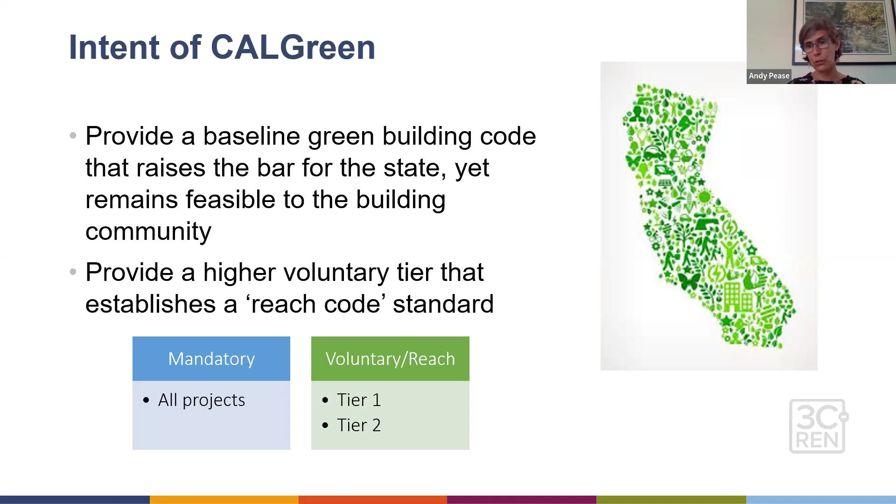So there are mandatory measures, and all projects are going to require those. The voluntary and reach tiers were intended for jurisdictions to have a little bit higher standard. A jurisdiction can either adopt the entire green tier 1 or tier 2, or they can spot grab them.

Mandatory is what we're definitely going to focus on—that's what we see more of going on. And there's an evolution, right, in our code cycle.

So in 1975 is when we started the California Energy Commission and the Energy Code. And it was good—it's been an amazing progression, catching it early for us.

In the late 90s, early 2000s is when LEED came online, Leadership in Energy and Environmental Design. It's a totally separate nonprofit entity, and that's been a successful program.

And then in 2009, California adopted CalGreen. It was totally voluntary at first, and then has become mandatory over each cycle, but they modeled it after LEED. Yay—that was huge. It was really helpful to be able to have some parallel.

And so it made it understandable for the folks who were already doing that, and it has continued to be a good structure for us. So as we go forward, we're getting better buildings, and they're more sustainable, energy efficient—all of those pieces.

So the highlights from the 2022 code change—it was really all about electric vehicles. The requirements, how it was structured, increased requirements for actual charging stations. There were some new ones for volatile organic compounds and emissions for insulation, acoustic ceiling tiles, etc.

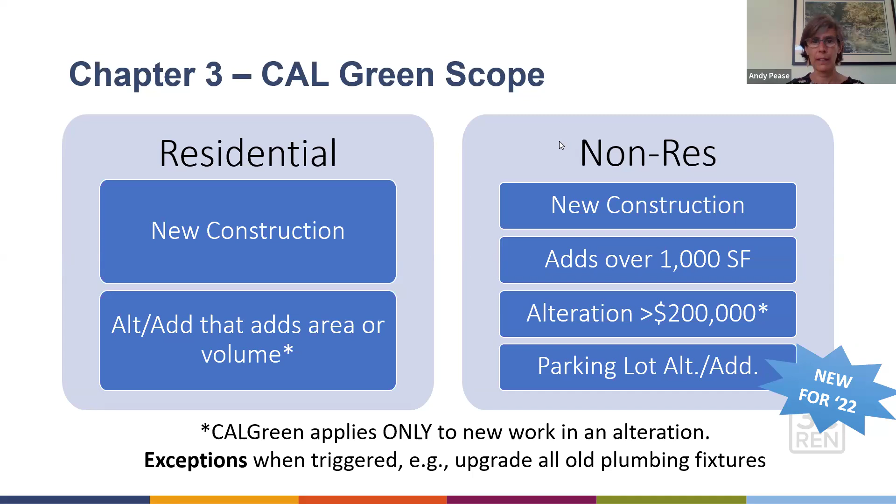And as we mentioned, parking lot alterations or additions are now part of the CalGreen scope. You also need to make sure to check for mixed occupancies. The residential parts need a residential checklist, and the non-res parts need a non-res checklist.

That's particularly true in mixed use, like hotels or motels. If it's a multifamily building with a community room that's only for the use of the residents, that still fits within the residential code. But if it has a restaurant downstairs or a retail shop open to the public, that would fit into non-res. So you might need 2 checklists.

And then for phased buildings, it just applies to whatever part is in that scope. So a shell building might just have whatever components apply—maybe it doesn't have plumbing yet—but then the tenant improvement will need to comply with CalGreen.

And then a tenant improvement has to hit those thresholds for a renovation—the 1,000 square feet or the $200,000 valuation.

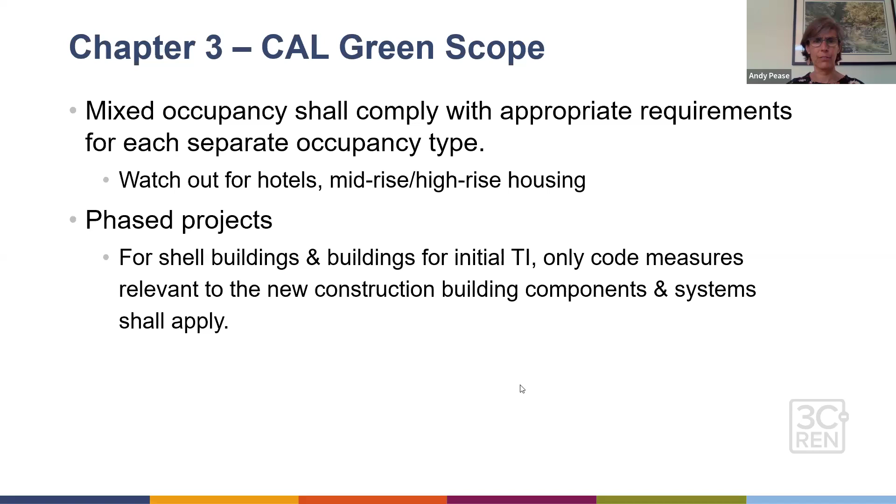All right, so how do we actually show compliance? We have an Excel spreadsheet with all the codes, and that way we can reference the notes. The AIA California has also put together this handy full page sheet. If you're an AIA member, you can get a hold of this, but it's only useful if you follow the notes—there's a yes, not applicable, and then a reference. So you can't just put this sheet on and be done. That's like putting the code on your plans but not incorporating it into the drawings itself.

So for whichever measure—if it's for outdoor irrigation—then you would show on the landscape plan where that actual compliance is demonstrated.

Okay, so we're going to jump into the mandatory measures of chapter 4 and 5. Again, this lines up with LEED. In LEED, it's site or location and transportation; here it's planning and design. Then we go to energy efficiency and then water efficiency—that's switched from LEED in the order, but still the same categories. Then material conservation, and then environmental quality is last—that's all the indoor air quality components.

Chapter 4, or division 4, is all residential, and 5 is non-residential, but they parallel each other. So as we go through this, when they're on the same page, on the same topic, we'll address them together.

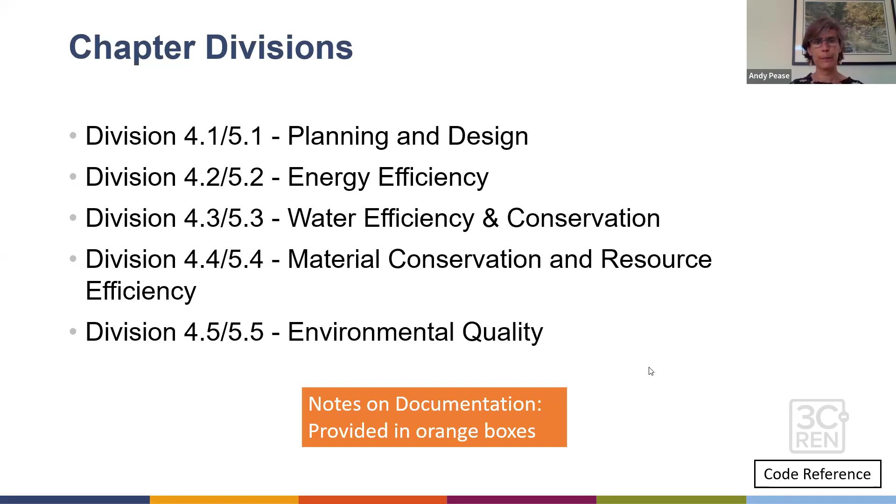Also, each one of these has the code reference down in the bottom right corner so you'll be able to circle back to the code. And throughout, we'll have these orange boxes with particular notes about documentation. If we can make it easier for the plans examiners and the builders, that's a win for everyone. Okay, we good still?

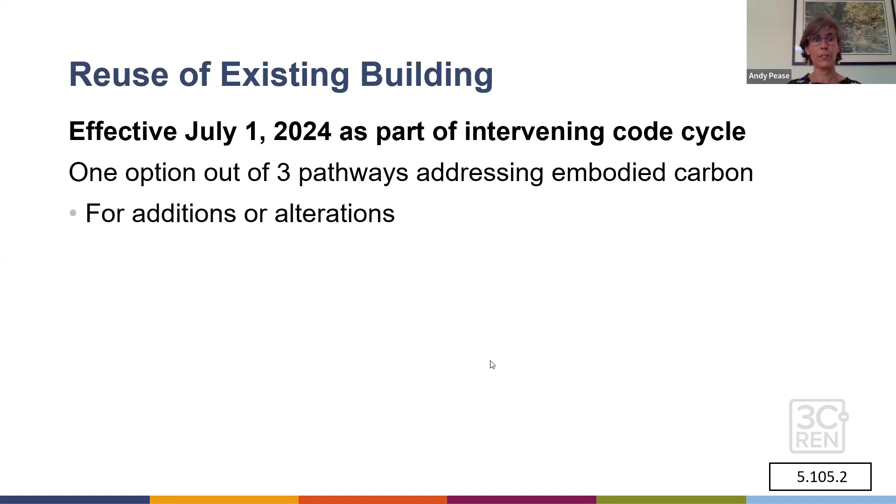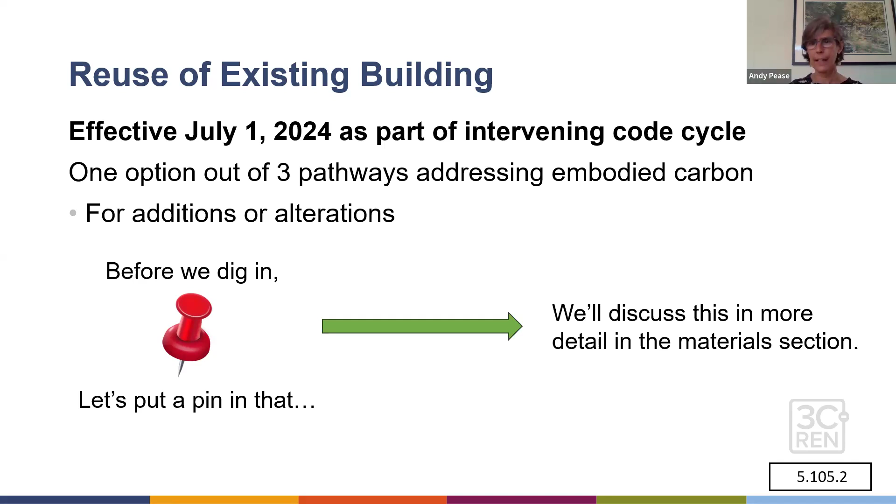All right, so the very first section under 5, in planning and design, is that effective July 1st, as part of the intervening code cycle, there's an option for embodied carbon for additions and alterations. But before we dig into that, it's super involved and there are 3 different paths, so we're going to put a pin in that and talk about it when we get to the materials section, which is the bulk of it. Okay, pretend that didn't happen—we'll see you again in chapter 5, or 4, I guess.

Okay, so these are ones I'm going to skip through because they've been in the code a long time, but just for folks who are new or want a refresher—like, oh yeah, that's where I find that. Stormwater pollution prevention during construction, for smaller sites less than an acre, you're just doing your best practices in terms of erosion control. And if it's larger than an acre, then you're going to get into the National Pollution Discharge Elimination System. This is very well monitored, and you're going to have your plans.

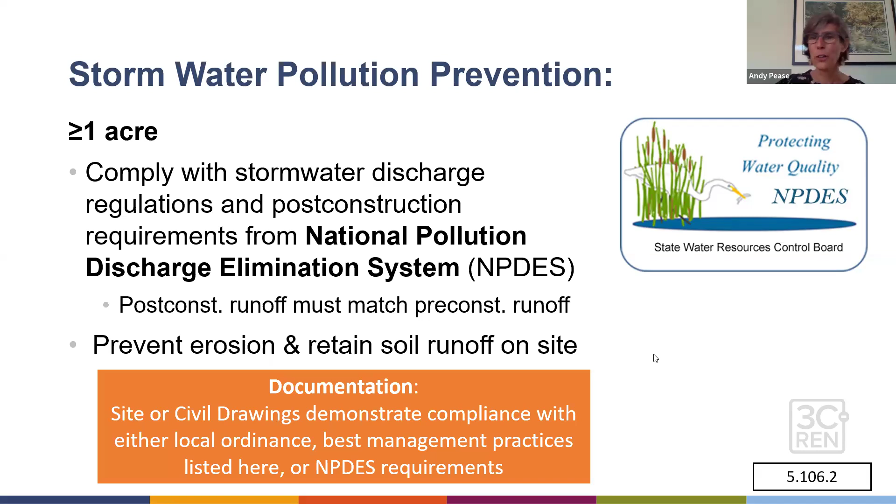They'll be looked at closely. So this is almost token that it's in here because it's monitored very closely.

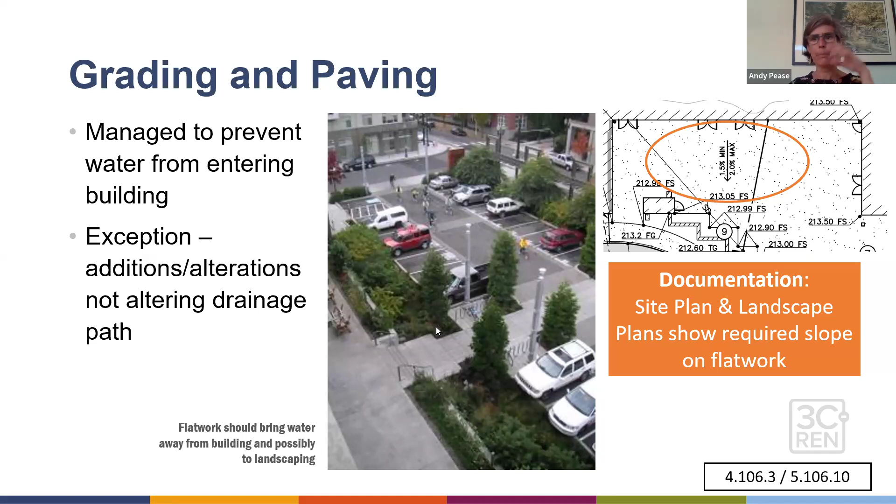But grading and paving, this is important. Again, this is good best practice. What we're trying to do is both have water slope away from the building, and that should be shown on any flat work near doors of the building, showing what that slope is. But also in this image, we're really moving toward capturing stormwater in ways that match the natural hydrology, so that we have bioswales, permeable paving, all the types of ways that we're slowing, spreading, and sinking stormwater on site.

Okay, going on to bicycle parking. This didn't particularly change in the last cycle, but we still sometimes see people get dinged up on it. There's short term and long term bike parking. Short term is for guests, and it could just be a regular bike rack, but it needs to be within 200 feet of the entry.

As a cyclist, I would also ask it be someplace super obvious, because it's really hard to be circling all over the building looking for them. It's in a ratio of how many parking spaces you have. Now if you have a big open lot for employees and guests, you need to make a call on how many are guests and how many are employees. It won't matter for anything else, but it is the metric used for short-term and long-term bike parking.

For long-term bike parking, think of your employees who want to bike to work - they want someplace secure for their nice bikes. So it could be lockers outside or a room inside, but it needs to be something secure. A couple of examples.

Oh, and public schools and community colleges have slightly different requirements, as you can imagine, more. You should put them on the bike calculation so that the jurisdiction having authority has an easy way to make sure you have enough, and then you need to show them on the site - either a site plan, architectural site plan, or landscape, or ideally all three.

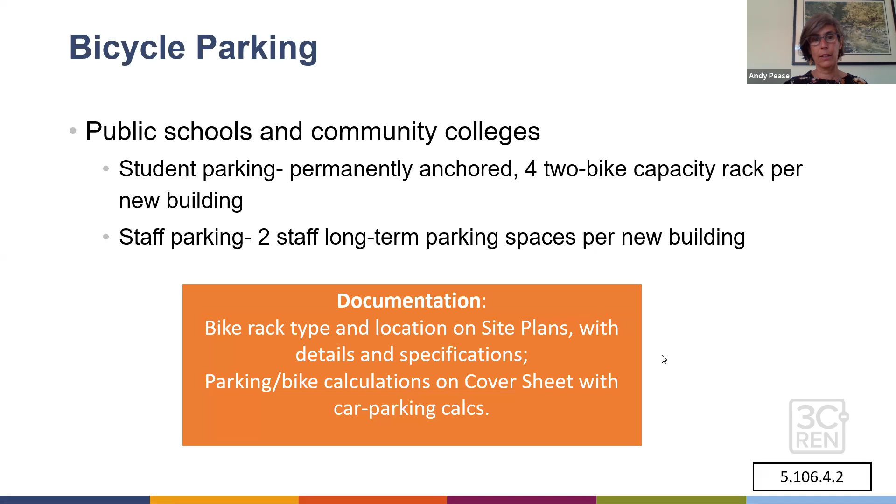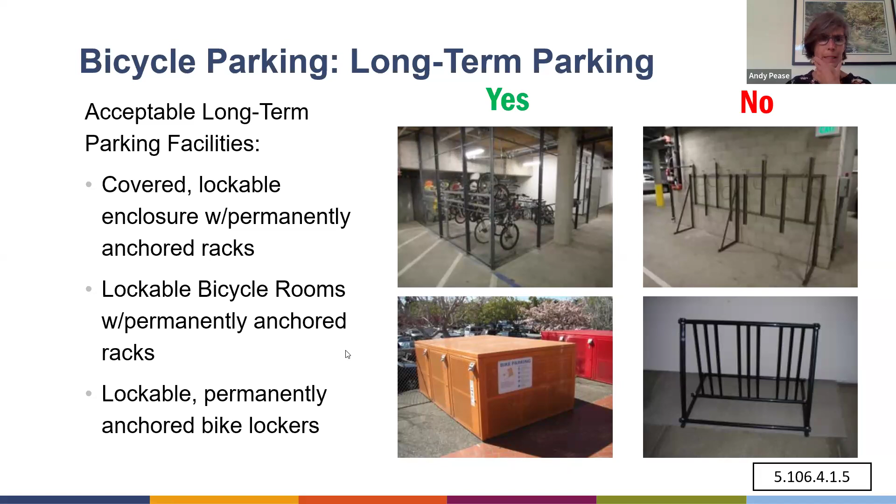Okay, now we're going to get into electric vehicle charging. We'll do some EV readiness, the definitions. We'll talk about single family, multifamily, and non-res. Then, new in '22, was getting ready for medium and heavy duty truck charging. And then finally, the additions and alterations.

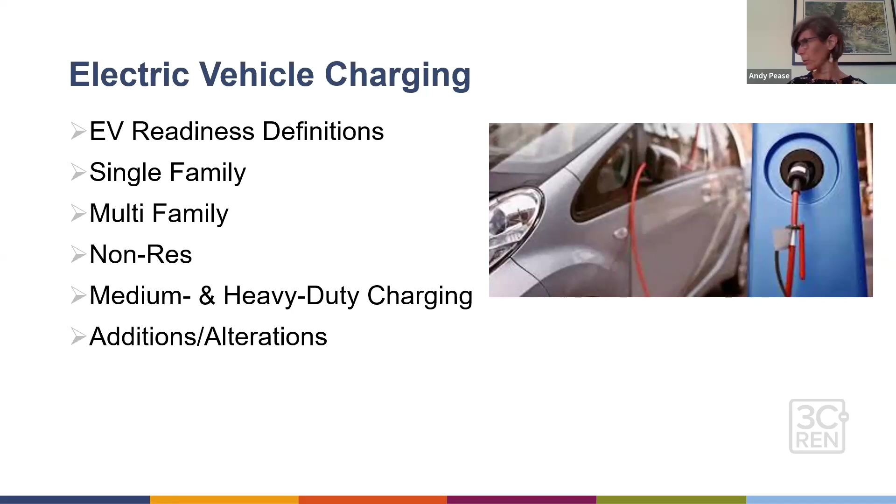Have we been able to address questions as they come up? Are we still doing okay on that? Yeah, we're still good on that.

All right, so there are basically 3 types of EV charging infrastructure discussed in the code. The first is EV capable, the lowest threshold - basically an empty conduit that goes from the panel to where you might have charging in the future. You can't use it for charging anything, but it's also not really wasted resources. EV ready is having a space that's fully wired and has maybe a receptacle, but doesn't actually have the charging equipment - it's ready for equipment and has space in the electrical panel, but it's not actually for charging. And then the third category is the actual EV charging - level 2 EVSE, with SE meaning supply equipment, which makes a charging station, an EVCS.

I just apologize on behalf of the California Building Code that we have to make that so confusing. All right, this little diagram I end up circling back to because the names are just not intuitive.

Okay, and just for folks who are not necessarily EV drivers or users, if that's newer to you: level 1 is basically the slowest you could possibly charge a car, just an outlet. That's not referenced in the code at all because it's only 120 volt, 16 amp. Level 2 is when it starts to be useful - this could be the actual charger at 208, 240 volt, 40 amp. It's important that it gets that higher amperage because there's another offering that's a lower amperage. And then there's direct current fast chargers, which you'd think of as Tesla, but there's a whole bunch of them now. They're allowed in the code, but they're not required, so we'll talk about some options for substitution.

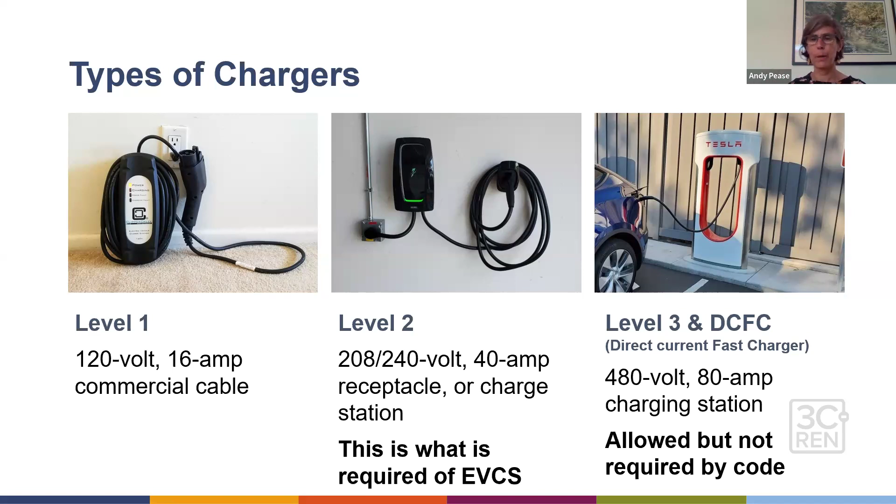For those spaces that are EV capable or EV ready, it needs to be really well labeled. If you've done the work of putting in a conduit, you've got to make sure it's super easy for somebody in the future to install those EV charging stations. So you've got to label the breaker, and you have to have the stub-up labeled at the actual EV space.

But you don't label the parking stall itself, because that would be confusing to the public. So think of it as communicating to the owners and managers about what's capable, but don't actually mark the stalls for people until you get to an actual charging station.

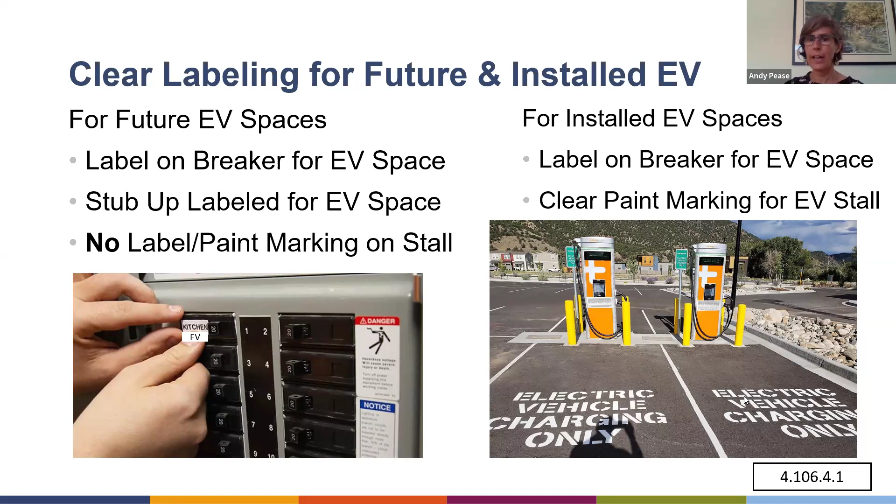And then clearly, once it is a charging station, you should mark that it's for EV charging only. Depending on which charger, they can be there all day, or they might need to rotate if it's a Tesla.

Okay, new single family — this is the lowest bar. All you have to do is EV capable. That's just an empty conduit to a panel, so somebody could do it in the future.

This was a big discussion point in the code, but in the end they decided, because adoption of EV charging is still all over the place, they didn't want people spending money and the material resource of copper to have wire abandoned in these conduits all over the state. So that's how I think about EV capable — it's the lowest bar.

And that's not required if you're doing accessory dwelling units or junior accessory dwelling units. The state has a very low bar for adding ADUs and JADUs, so they do not trigger the requirement for EV capable — that's if you have an attached garage associated with it.

Okay, so multifamily and hotel-motels. Last month we covered EV capable and EV ready, and now we have more. As of July 1st, 40% of all parking spaces need to be low power level 2 EV charging receptacles, which I'll touch on in the next slide, and then 10% need to be level 2 EV chargers.

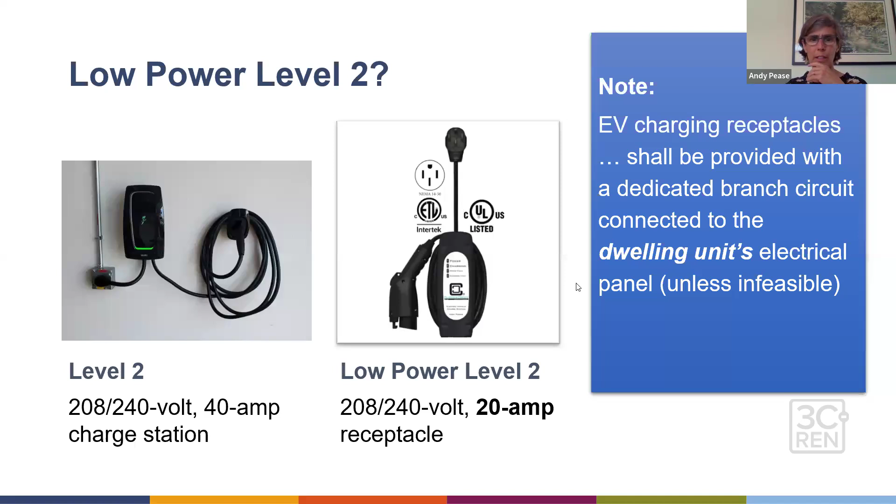It should be assigned — if the parking spaces are assigned to the unit, then you have to have the charging stations assigned to the units. And that makes sense, right? Because you want alignment of your power use with your electric bill. There are exceptions — if it's not feasible for whatever reason, that's okay, but that is the intent: to have the charging billed to the individuals.

Okay, in the non-res world, there's a table based on the number of electric vehicle charging stations and how many of them count — basically this empty conduit requirement. The kind of weird thing here is that the number of charging stations gets deducted out of the capable count. So if you have 28 parking spaces, 8 of them need to be capable, but 2 of those 8 need to actually have charging stations.

So you're really doing 6 capable with empty conduit, and 2 that have the actual charging stations.

So again, apologies on behalf of the code, that is a little confusing, but that is the intent.

Interestingly, it's a reminder, the supply equipment that they reference here versus an EV charging station. And then at least 1 level 2 supply equipment shall be provided.

Okay, now why would they say that? Because they already just said it needs to be supply equipment. Well, that's because they give you a few options to be able to comply.

So if you are in a community where people are going to have fast chargers, you can actually sub out. You can do a level 2, or if you have 1 DC fast charger, it can substitute for 5 of the level 2 chargers. So if you require 8 level 2 chargers, you can do 1 of the Tesla type and the other 3 as level 2, or you could do 2 and that would cover it, except for this little requirement: at least 1 of them needs to be a regular level 2, because they figure not everybody's going to have a Tesla.

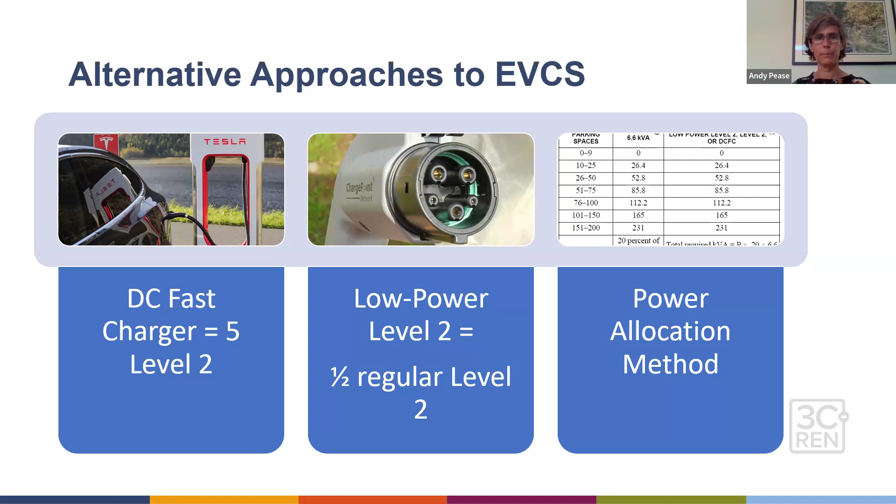Okay, and then just a reminder that any type of parking with electric vehicle charging still needs to have access compliance. If it's hotels, motels, public housing, it's going to trigger ADA access for electric vehicles.

There's different ways to do it. You can have 1 charger that goes to the compliance here. If it doesn't show up in chapter 11, there's also, in CalGreen, specific dimensions for electric vehicle spaces to make sure that they're hitting the right minimum size requirement.

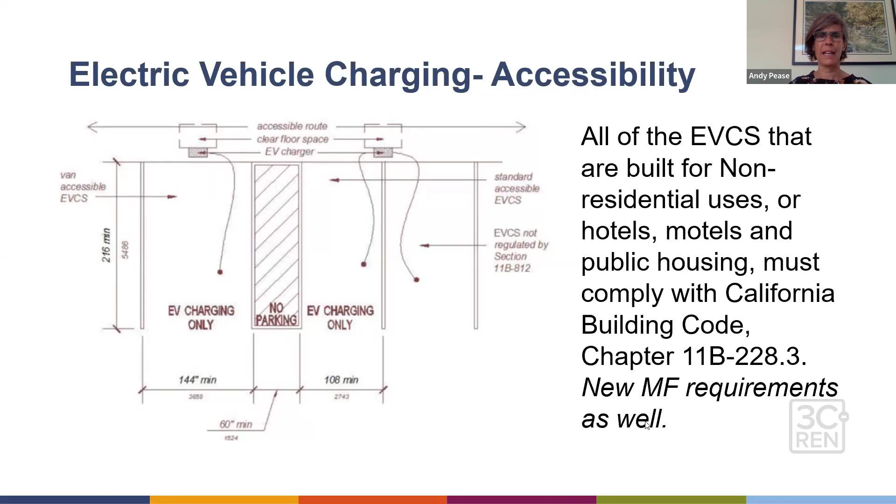And it does not count for your accessible parking. So if you need 3 accessible parking spaces for your project, and you need electric vehicle spaces, then the electric vehicle space needs to be van accessible, and it doesn't count for your 3 minimum ones, because you don't want somebody taking up the charging space and not allowing for EV.

So again, bigger topic. Hopefully that's enough for you to remember to just check on the access compliance.

All right, and then kind of going on to this, came out new in 2022: we need to have capacity for the electrical capacity and raceways, so the conduit, this is that EV capable type of thing for trucks. Up through last month, it was grocery stores, retail, and warehouses, and you could see the size of the building thresholds. As of last week, we have now added manufacturing facilities and office buildings of a certain size.

So we're going EV trucks, and we want to make sure that we're ready as a state. So there's kind of a KVA and capacity requirement there.

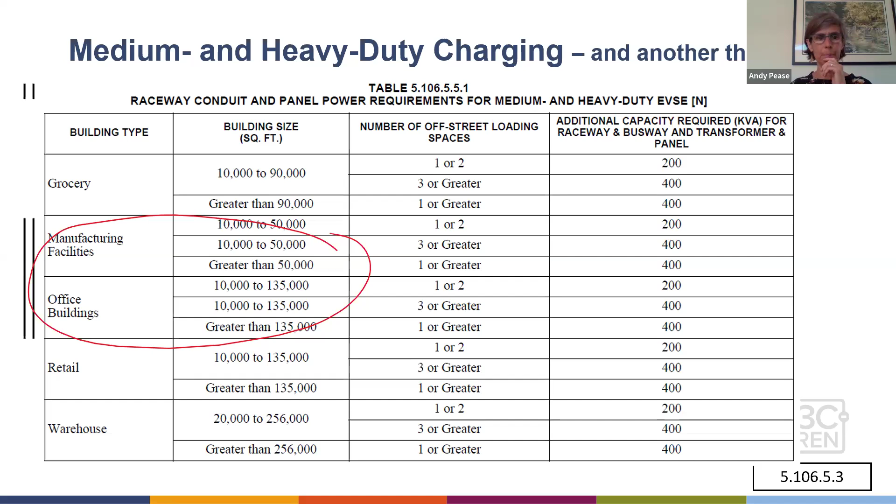Okay, there's also new EV charging requirements at public schools and community colleges, very similar to the non-res, just a slightly different table. These are a couple spots from Cal Poly.

And then this parking lot additions and alterations — the idea here is that if you're just restriping or refinishing, it doesn't trigger the requirements. But if you are adding on new square footage of parking, or digging it up enough that you're adding electrical, solar panels, or adding lighting so you're running conduit and messing with the electrical, then you need to add in electric charging in alignment, whether it's res or non-res.

So for residential HCD projects, it says 10% of spaces that are added or altered must be EV ready. For non-res, basically whatever you've triggered now needs to meet the non-res requirements.

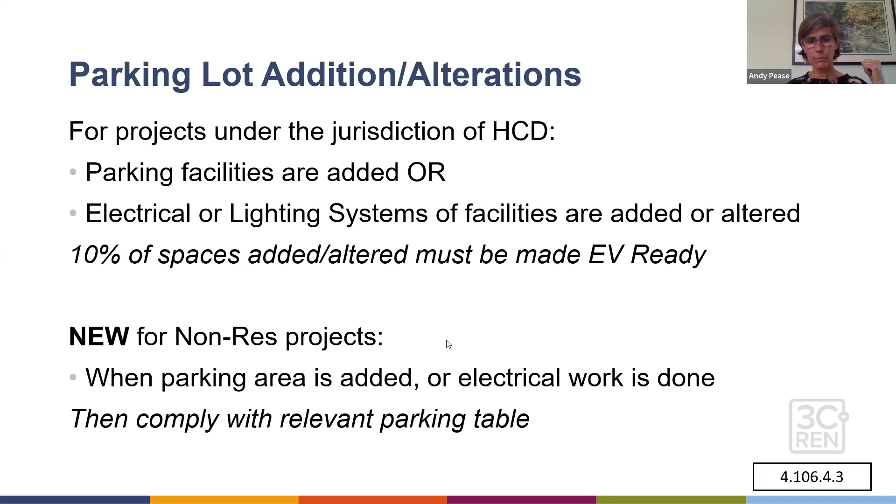Documentation for EVs, again, let's make it easy for our plan reviewers. Have the calculations on the cover sheet, show the number of spaces. There are two ways to label the plans. One shows this is an EV-ready space, for the plans examiners to know where to put things, or for coordination with your electrical engineer. But EV charging only communicates to your builder what striping to put on the stall. So make sure it's super clear between those two, what's being striped on the stall by the contractor versus communicating to the team and the plans reviewer where you have the conduit stubbing up.

And then, of course, sufficient capacity should be shown on your electrical sheets, and again, make it super obvious for that electrician to understand about labeling it as well.

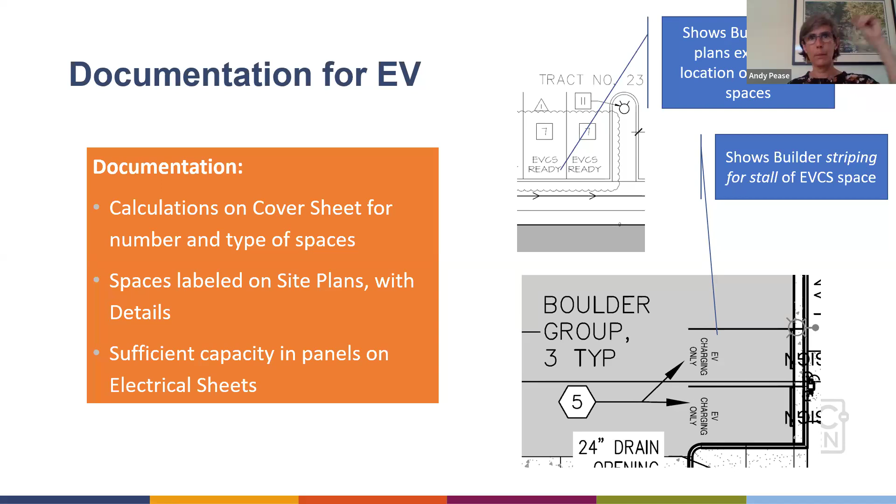If you've been doing this for a while, you remember we used to have this whole designated parking for clean air, van pool, EV, and all of that's gone. We're not doing that anymore because now we have charging stations. Code moves quickly. You'll still find lots of parking lots that have this kind of striping and labeling, but that's no longer part of the code.

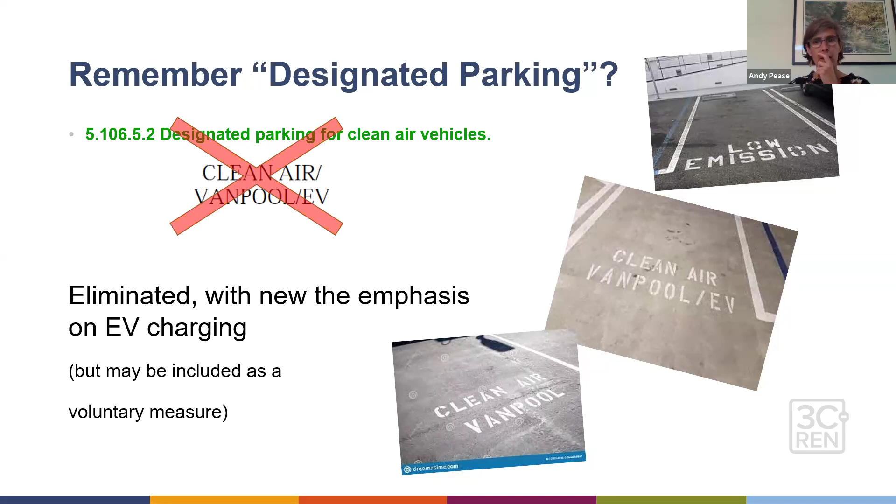You can add, there is a voluntary measure option that you can get some credit for it.

Before we move on from EVs, we have a question from Peggy. Do third-party level 3 high-speed chargers provided by an EV charger company get credited to the property owner? My understanding is yes, if it is on the property. And even if there's a fee associated with it, it doesn't say you can't charge for the electricity. Great question.

In fact, we did that for the hotel down in AG to be able to do that. They had a fast charger there.

All right, I'm going to finish up the site, the planning and design credit before we move on to water. There's just a couple left in here.

Just outdoor lighting. Again, this has been in the code a long time, keeping track of that backlight, uplight, and glare, the bug ratings.

The one thing they did fix in 2022, or maybe even the intervening code cycle before that, is to align it with the energy code, because there was an exception if it's a super low wattage, or lumens with less than 6,200 initial lumens, that doesn't need to show their bug rating. So do provide a lighting schedule on the site plan or the electrical plan with the required bug rating and the bug rating of the fixture, so you can just check and make sure that it complies. We've gotten dinged on that one for sure. A lot of people, especially with super unusual light fixtures, just might not have bug ratings.

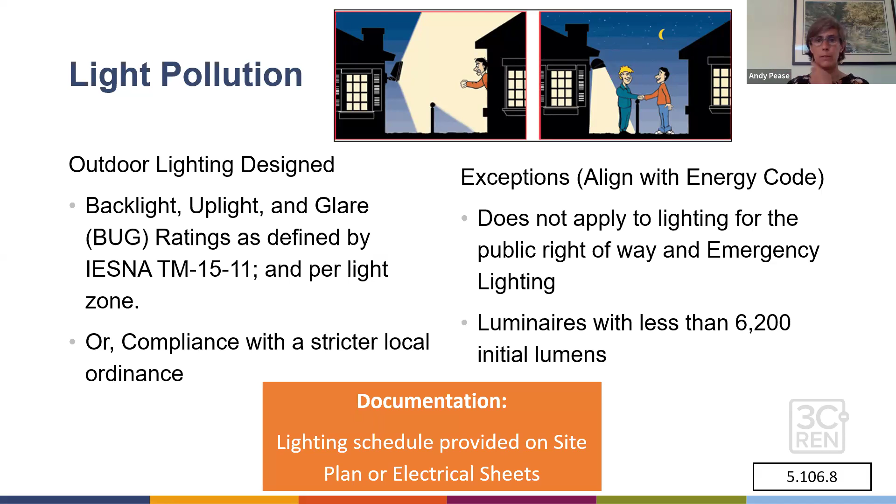And then for schools, there's a requirement for shade trees, so be sure to check that out if you're doing schools. And so that's the site, planning and design credit.

And then energy efficiency, for both residential and non-residential, the requirement is to comply with Title 24, Part 6, the energy code, and any local reach codes. And that's it, truly, the energy code.

Okay, and then we're going to go on to water. And I'm going to let Tatiana take that one on. All right, thanks, Andy.

The requirements for fixtures and fittings are pretty straightforward. We have this chart showing the allowed flush and flow rates in gallons per minute, gallons per flush, or gallons per cycle. An important thing to pay attention to are things like WaterSense labels for toilets and shower heads. Also, residential bathrooms have a maximum of 1.2 gallons per minute, but they're also the only fixture with a minimum rate of 0.8 gallons per minute. So sometimes in mixed use buildings, there will be a blanket 0.5 GPM faucet put in for all lavatory faucets, but that doesn't meet the minimum requirement for residential. So we want to make sure we're hitting that threshold in the residential spaces.

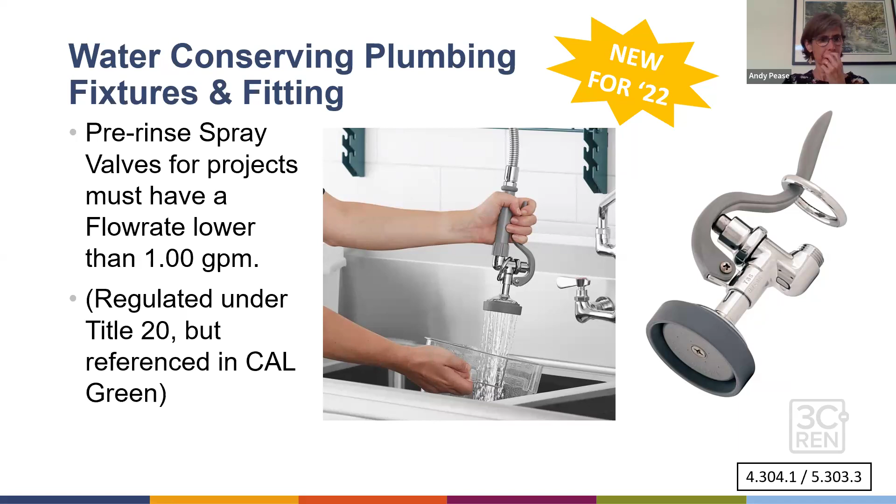Pre-rinse spray valves were added as part of the 2022 code cycle. This used to be a tier 1 option, but is now included as part of the mandatory measures. These must have a flow rate lower than 1.0 GPM, and it's regulated under Title 20, but is referenced in the CalGreen code.

There's also mandatory measures related to water submeters. We put together this decision tree to see if it's required depending on the project and use types. For non-residential projects, a new construction project or addition over 50,000 square feet needs a submeter if you have a use over 100 gallons a day. If it's less than 50,000 square feet, you don't need a submeter unless the use is considered excessive, meaning over 1,000 gallons per day. This could be something like a building with multiple tenants. If there's a use like a restaurant or a laundromat, in those cases, you'll need submeters. And then for multifamily, all units must be submetered per the plumbing code.

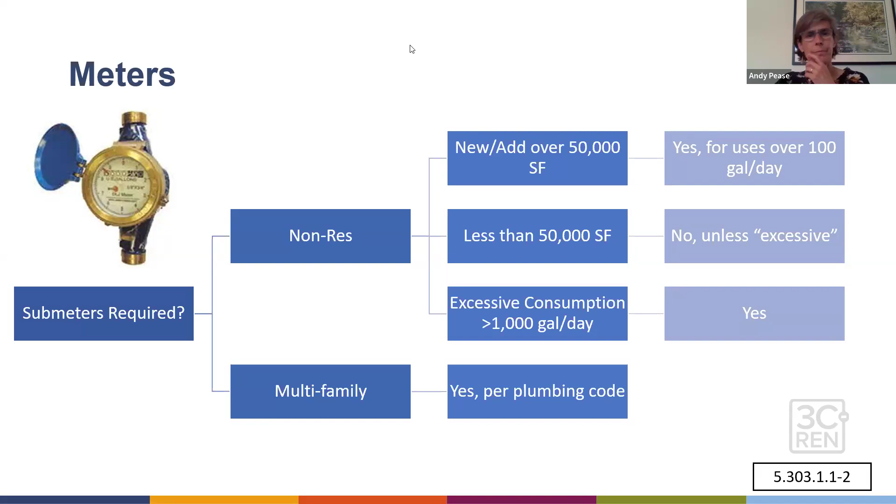Food waste disposers also have a gallons per minute maximum threshold. They must be less than 1 gallon per minute when not in use, or have an automatic shutoff after 10 minutes, and less than 8 gallons per minute when in use. And so all of this needs to be included in the plumbing fixture schedule.

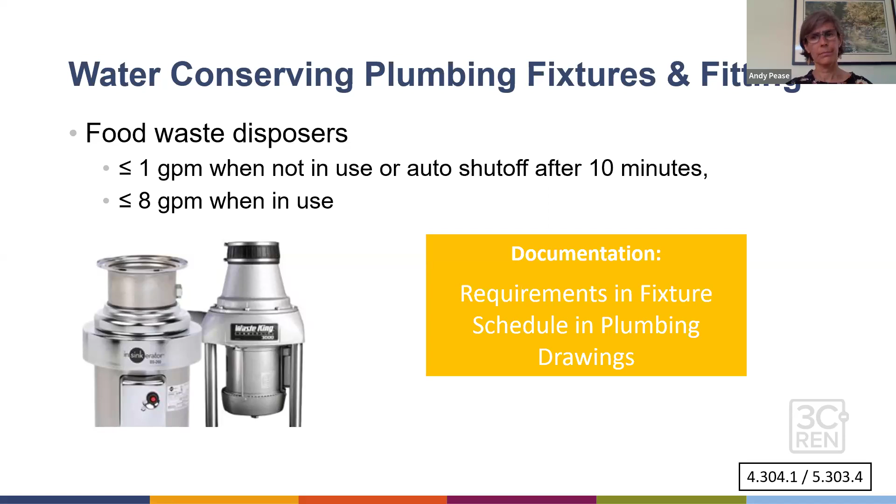So for special uses, MWELO is required for public schools and community colleges where there's 500 square feet of newly constructed landscape projects, or 2,500 square feet of rehabilitated landscape projects. And healthcare facilities must comply as well.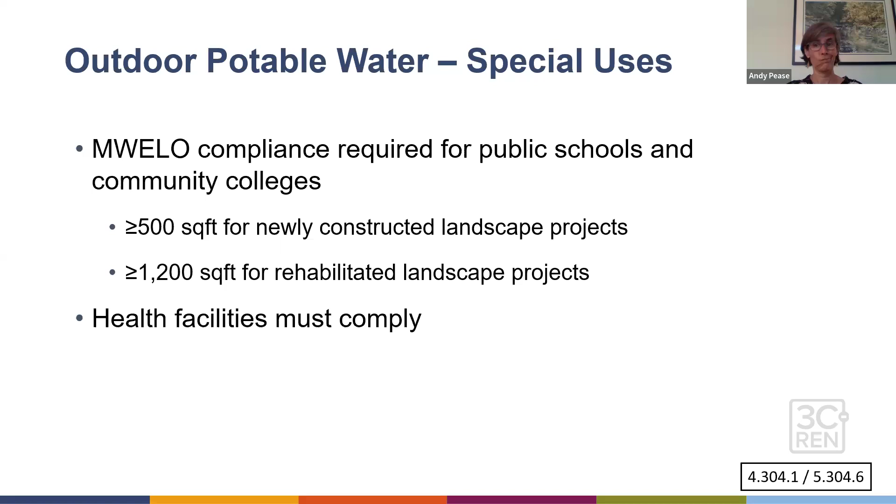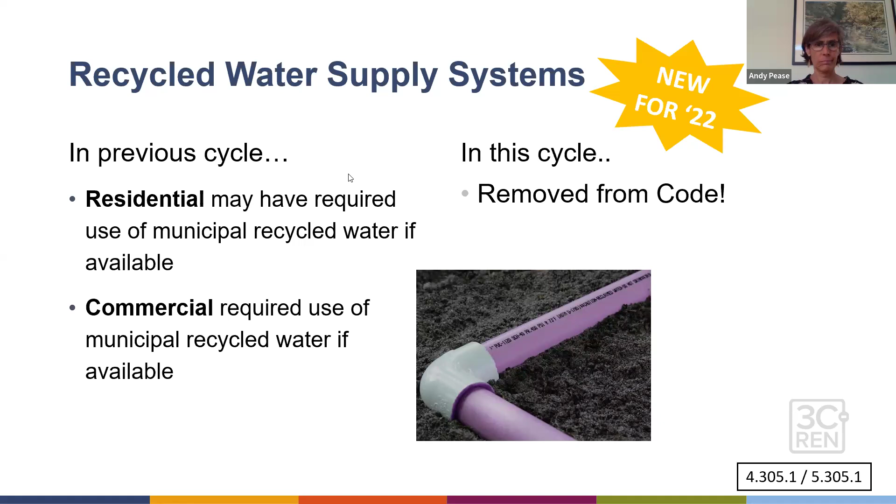And now I think I'm passing it back over to you. Yeah, we'll keep trading here.

So now we're going on to part 4, material conservation and resource efficiency.

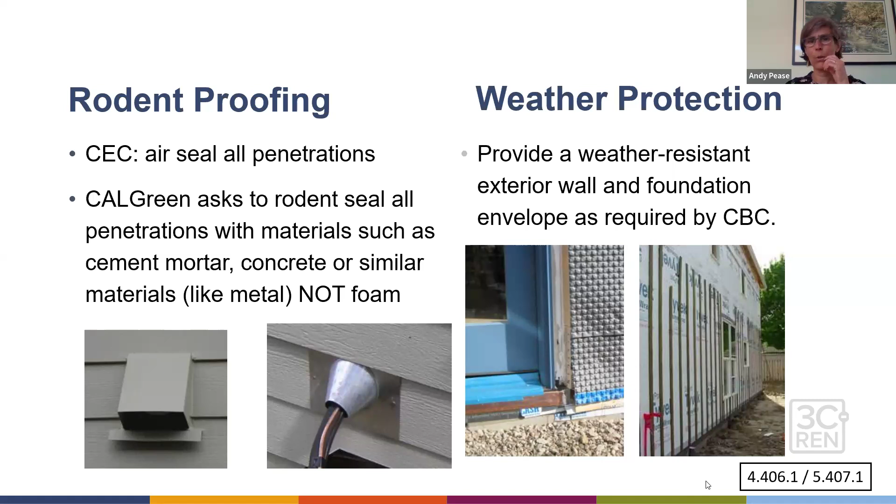Just a couple of quick notes here, just the rodent proofing, making sure that for these residential projects that if you have a penetration, you're not just packing foam or something around it. It needs to be cementitious or metal, but the critters chew right through the foam, so don't do that. And then just having a weather resistant exterior wall and foundation, of course.

This is one that folks sometimes miss, is that the areas that are opening not only need water resistant materials, non-absorbent flooring within 2 feet around that opening, but any regular entry, so it could be just an employee entrance as well, not an emergency exit or something, but main areas need to have either a 4-foot deep overhang or a recess. So you can't just have an exposed door or an exposed door with just 2 inches of recess. And that makes sense, right? You don't want the water coming into the building every time the door is open. It does, we do get rain here sometimes.

And then under construction waste diversion, it's up to 65%. Of course, it was at 50% for years. So you have to have a plan, and there's also an option that you can reduce the generation that came out of a LEED program, that if you just generate less waste. I have found that extraordinarily difficult to do. It's just, you have to be really efficient or do a lot of off-site prefab kind of manufacturing.

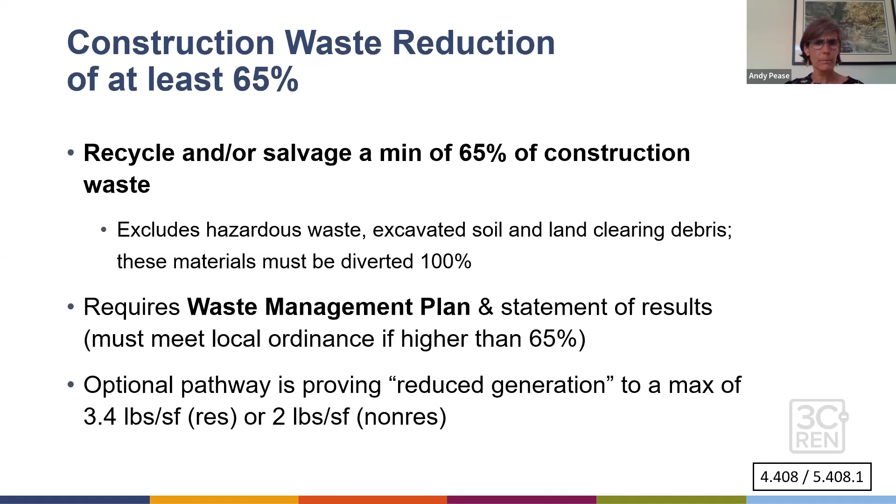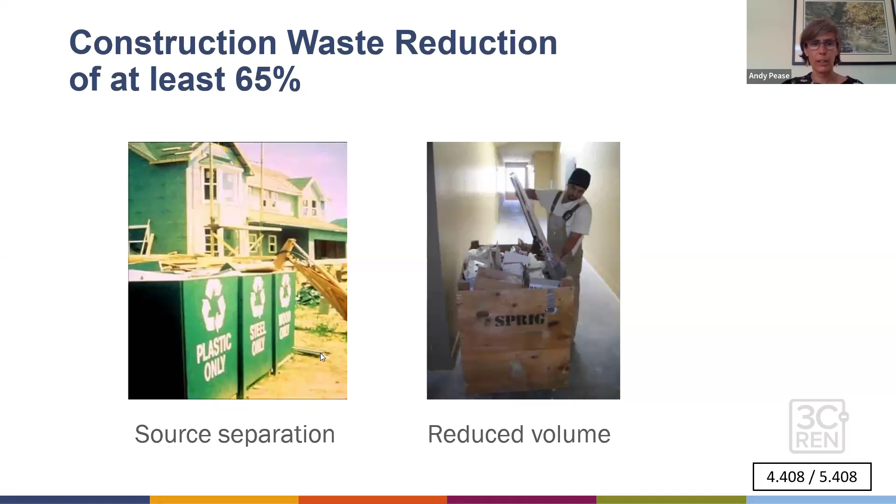And then you can do either source separation on site, or you can have it sorted off site, but provided with the documentation. And again, the reduced volume option. For additions and alterations, you've got to be able to track household hazardous waste, so that's the fluorescent lamps, any thermostats that have mercury, that type of thing. And of course, land clearing debris needs to go right into the compost. So documentation is pretty straightforward in terms of permitting, that you have to have notes that you're going to do this. But in terms of waste management, most jurisdictions are going to require documentation of the diversion itself in the plan.

Okay, woo! Embodied carbon. Turning that back to Tatiana.

All right, circling back to embodied carbon. Effective last Monday, July 1st, it is now required as part of CalGreen code to address embodied carbon on non-residential projects 100,000 square feet or more, or schools under jurisdiction of DSA 50,000 square feet or more. This will reduce on January 1st of 2026 to 50,000 square feet for all non-residential projects. And there are 3 pathways to compliance. We'll talk you through each of these: building reuse, life cycle analysis, and the prescriptive path.

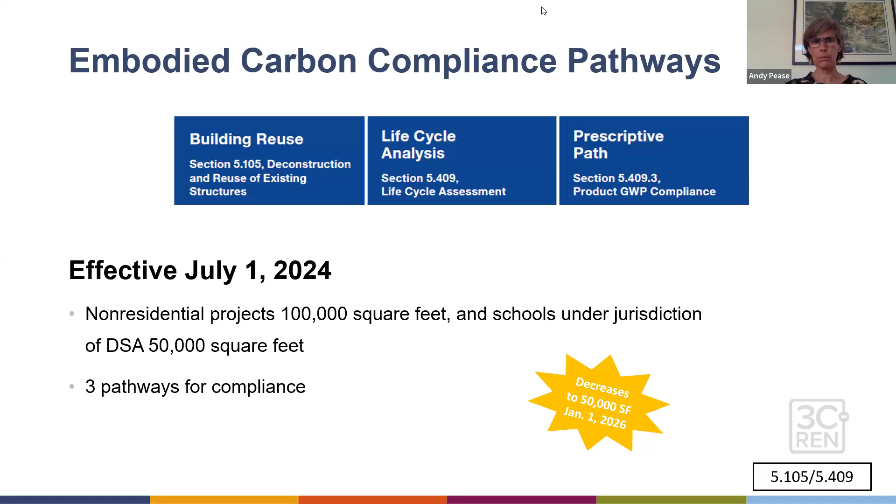To understand each option, we need to know what embodied carbon is, where it shows up in the construction process, and the scope for looking at each of those pathways. Embodied carbon refers to the greenhouse gas emissions arising from manufacturing, transportation, installation, maintenance, and disposal of building materials. We don't want to confuse this with operational carbon, which relates to emissions from building energy consumption—that's probably the carbon emissions you're most used to hearing about.

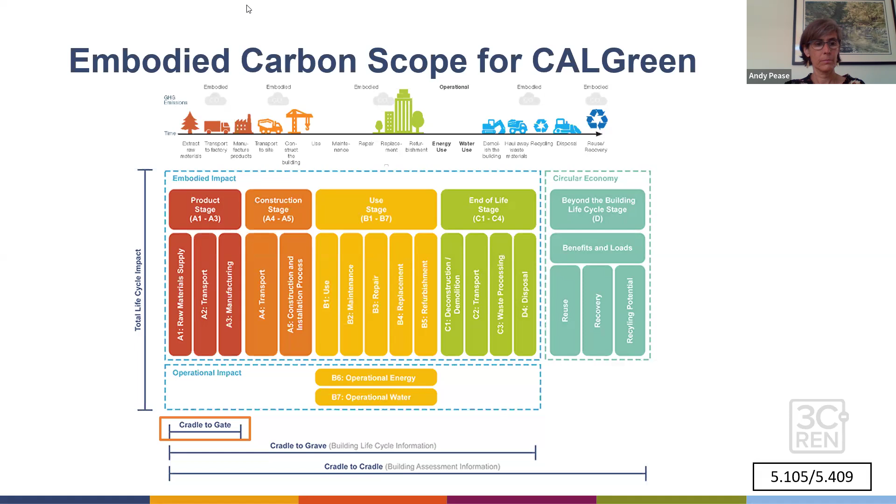Focusing on embodied carbon, you may have seen charts like this showing where you'll find carbon in the construction process. This cradle to gate scope looks at the product stage—your raw materials extraction, transportation, and manufacturing, things that go into making the product. This is the scope you'll look at for the prescriptive pathway.

Next is cradle to grave. This includes that product stage, but also construction, use, and end of life stages. This is the scope included in the whole building life cycle assessment. Last is cradle to cradle, which includes the whole cradle to grave scope, but additionally includes things beyond the building life cycle, like recycling or reuse—which is where we'll be looking at the existing building reuse category.

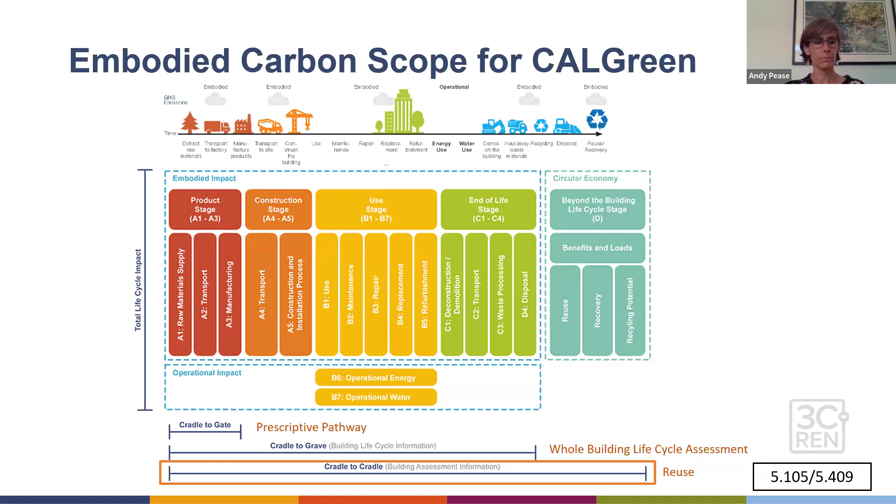A little more detailed overview: we have our building reuse option for additions, where the addition is less than 2 times the area of the existing building. The mandatory measure requires 45% of the structure and enclosure to be reused. Next is the whole building life cycle analysis—the modeling pathway, where you'll need to show a 10% reduction in embodied carbon from a baseline building. Last is the prescriptive pathway, which targets carbon reductions in specific materials. For the mandatory measure, this limits the global warming potential to 175% of the industry-wide average from environmental product declarations.

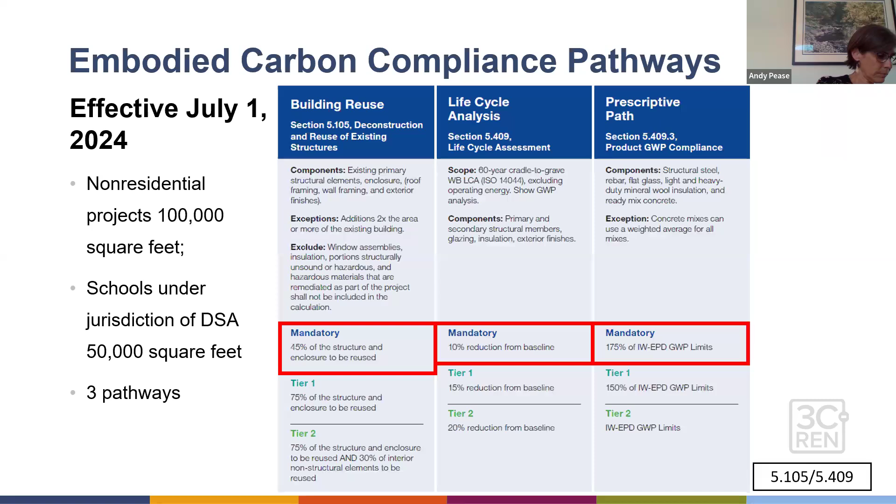We're going to dig into each of these here. The first option is reuse of an existing building. Again, this method is for additions or alterations where the addition is less than 2 times the area of the existing building. For our example, we have a 45,000 square foot existing building and an 80,000 square foot addition—so it's more than the 100,000 square foot threshold to trigger the need for an embodied carbon analysis, but less than 2 times the existing area.

This method targets primary structural elements and building enclosure materials, as seen here on the bottom left, and you're excluding hazardous materials as well as windows and insulation. That's to encourage replacing the windows and insulation with higher performing materials.

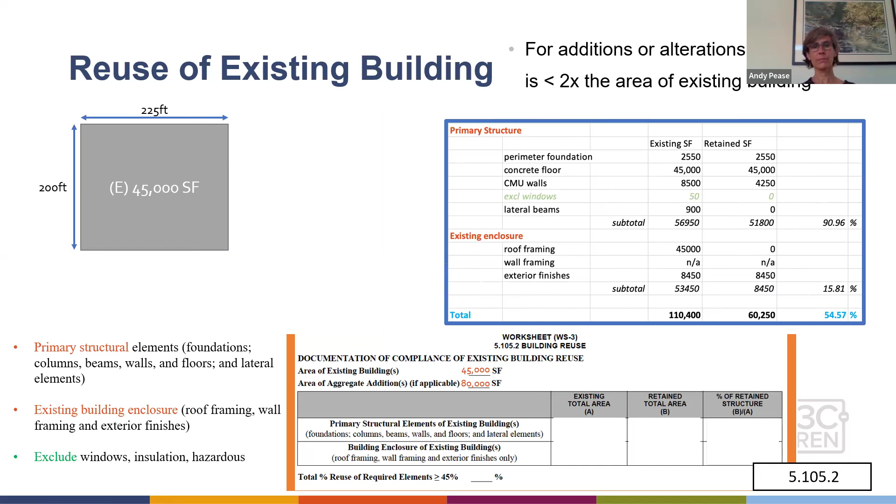This is a quick example of how you do the calculation and documentation. CalGreen provides this worksheet 3, where you'll first enter the area of the existing building, 45,000 square feet, and the area of the addition, 80,000. Then you'll make a quick spreadsheet like this, listing your areas for the primary structure and enclosure elements. In this example, we have the perimeter foundation, concrete floor, CMU walls, lateral beams (excluding windows), and then the roof framing and exterior finishes. Those all add up, and you'll drop the totals in the table below for the existing area.

For the retained area, let's say we're keeping the perimeter foundation, concrete floor, half of the CMU walls, and the exterior finishes, and then demoing the lateral beams and getting a new roof. So you add up your retained square footage, drop those values in the table below, and then it's just a percentage. In this example, we're retaining 54.57%. As a reminder, the total percentage just needs to exceed 45% to comply.

The second method is the whole building life cycle assessment. To use this one, you'll need to build a model similar to an energy model, but instead of measuring energy usage, you're measuring embodied carbon. This looks at that cradle to grave scope over a reference study period of 60 years.

You're looking at the same materials as in the building reuse method, except this time you're including the glazing and insulation. And we get a lot of questions on how to generate a baseline to compare your design building to.

That reference building or your baseline building should have the same location, orientation, size, function, and space conditioning as the proposed, and that way you're ensuring that you're just comparing the materials. The materials baseline should be based off of what a typical building design for that type of project in that location would have.

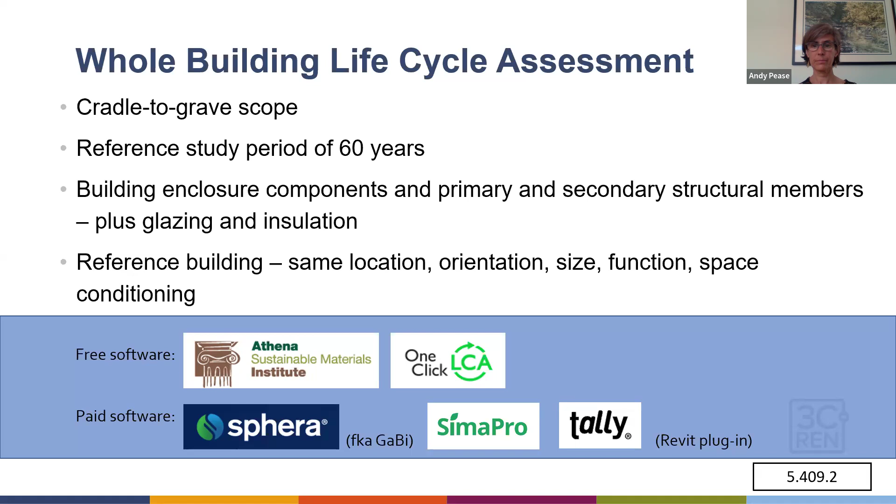And we've listed some tools here below. Athena and One-Click LCA are free tools, and there are paid software options as well, such as Sphera, SimaPro, and Tally. Tally in particular has a Revit plugin, so if you have a good Revit model already built, it can be imported into that program so that another model doesn't have to be built from scratch.

Okay, so this is an example of what a project looks like in Athena. It's a typical trunk and branch structure, again, similar to an energy model. You'll go through and describe building assemblies through dialog boxes that request simple information like bay sizes and loads, and the software does the rest. It'll calculate a bill of materials and the associated environmental impacts for you. Users have the flexibility to add materials as needed or import their own bill of materials from any CAD program.

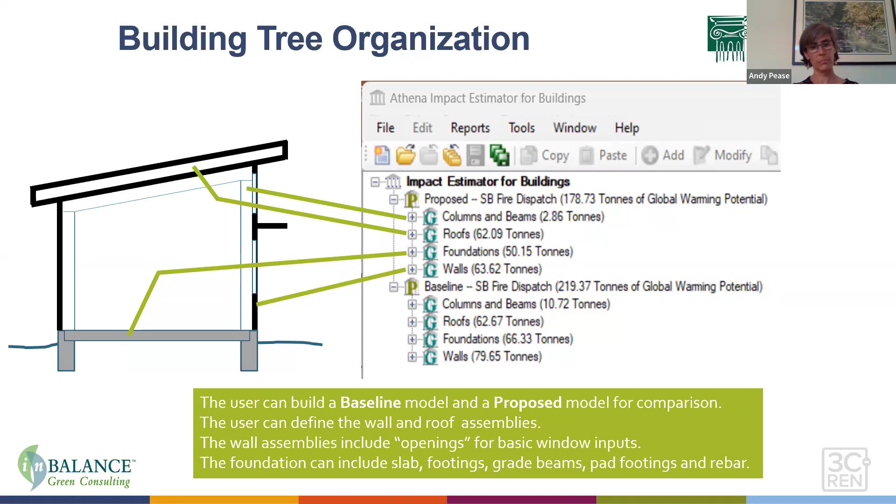We have a more in-depth presentation digging into the weeds on how to use Athena that can be found on the 3C-REN website in part 4 of our ZNCD series from last year. And the Athena portion starts at about minute 30. I'm going to also drop the link in the chat right now.

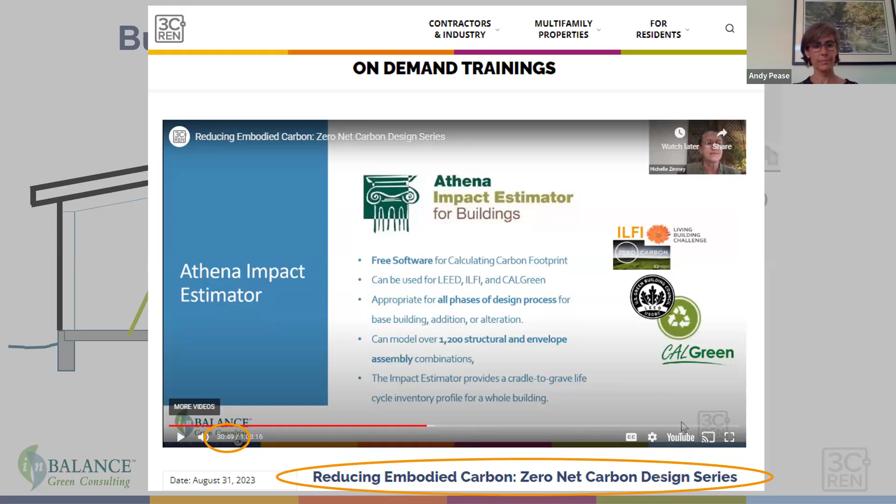And the last of the 3 pathways for embodied carbon is the prescriptive path. This method has a much more limited scope, targeting some higher impact materials determined by the Buy Clean California program, like certain types of steel, glass, and insulation, and of course, concrete.

So this table here shows you the maximum acceptable global warming potential value, which is based off of industry-wide averages. For products on the top half of the chart, you just need to find products with a global warming potential below what is allowed. For concrete on the bottom half, compliance is determined by a weighted calculation.

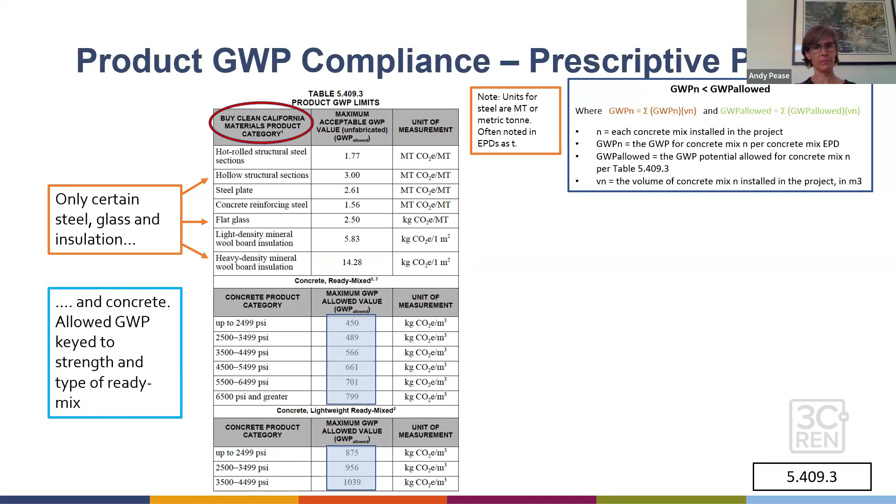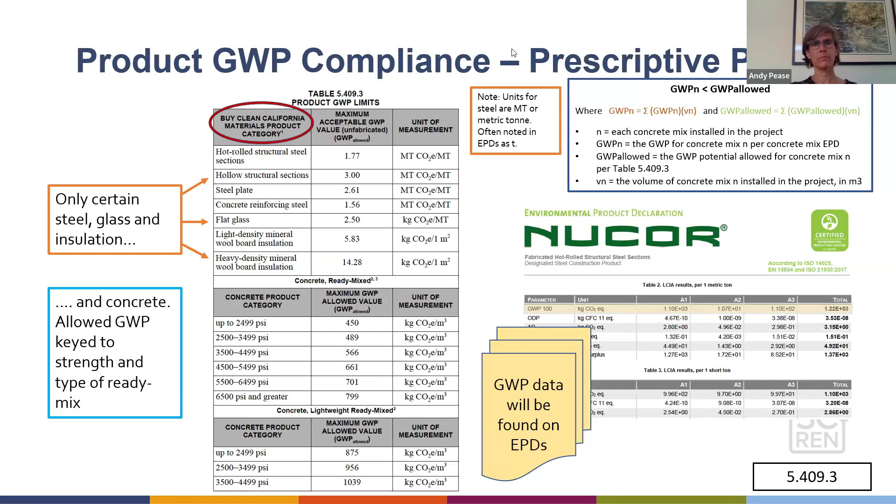So most of us are probably not working on 100,000 square foot buildings where... sorry, oh, that was my bad.

So, most of us are not working on 100,000 square foot buildings where the embodied carbon requirement is triggered by code. But as we mentioned earlier, the square footage threshold will be reduced to 50,000 square feet in 2026, and over time, we can expect it to become relevant to a wider variety of projects. So we want to start thinking more about strategies addressing embodied carbon now, so you can start implementing some of this.

Next, we have rebar, which has a potential for up to a 10% reduction by using rebar with recycled content. There's also emerging technologies like fiberglass rebar we're starting to hear more about. And similarly, structural steel with high recycled content can make a significant impact, or using things like mass timber instead.

Insulation is an interesting one. We'll look at that a little bit more on the next slide, but a big difference can be made using materials other than foam.

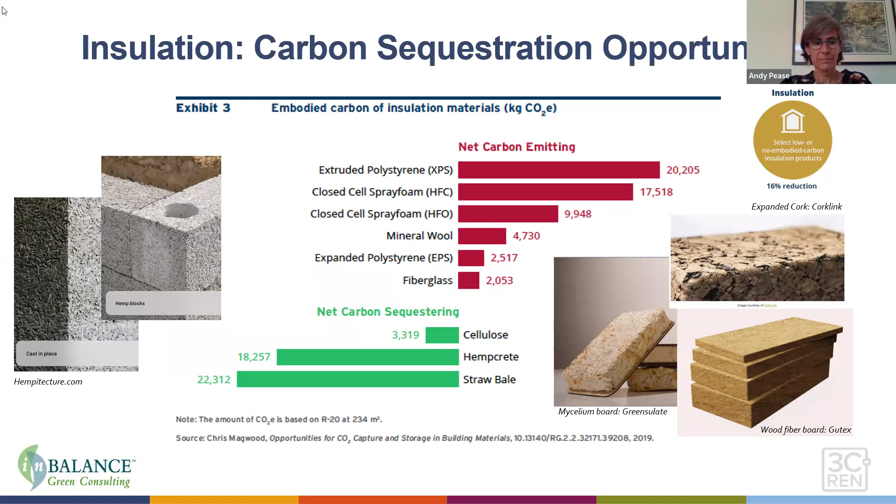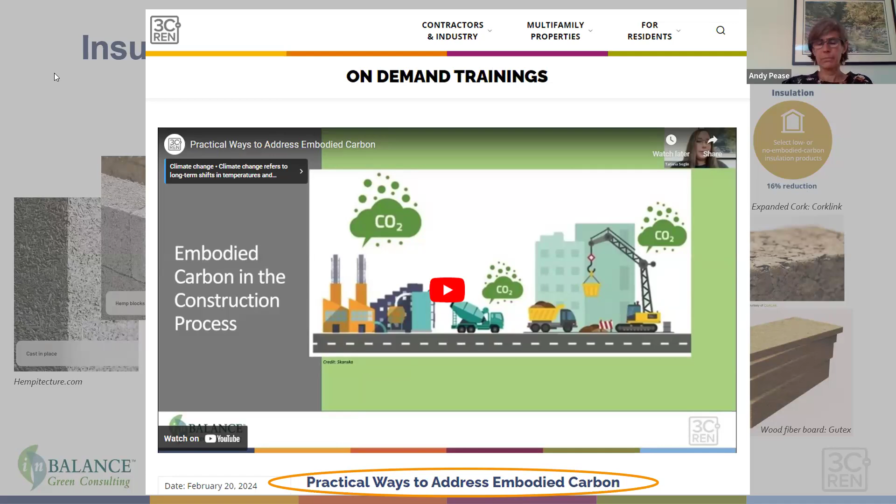We have a lot more information on this topic. We have a whole other presentation completely dedicated to looking much deeper into each of these three embodied carbon strategies, and a lot more information on sequestering as well. That presentation is also available for free on demand on the 3C-REN website, and I'll drop the link for that one in the chat as well. I think I'm handing it back to Andy.

All right, awesome. Yeah, we're super excited about embodied carbon. We understand that operational carbon has the carbon savings over the life of the building, whereas those embodied carbon emissions, associated with construction, transportation, and manufacturing of the building and the product, are impactful now. So this helps us get to our climate goals in a timely way as we need them.

So just a few more items within the materials section. The operation and maintenance manual, for residential, requires you to provide the building owner representative with a manual that contains all this stuff about how to operate a building, warranties, and interestingly, in this intervening code cycle, they actually added a couple sections to those requirements.

Defensible space, so they're thinking about wildfire activity and how to impact that. So do be sure to check that out. I feel like this is one section of the code that's kind of dwindled in terms of use, but I think it's really important, and the manual can be online or cloud-based as well. So definitely check out that section.

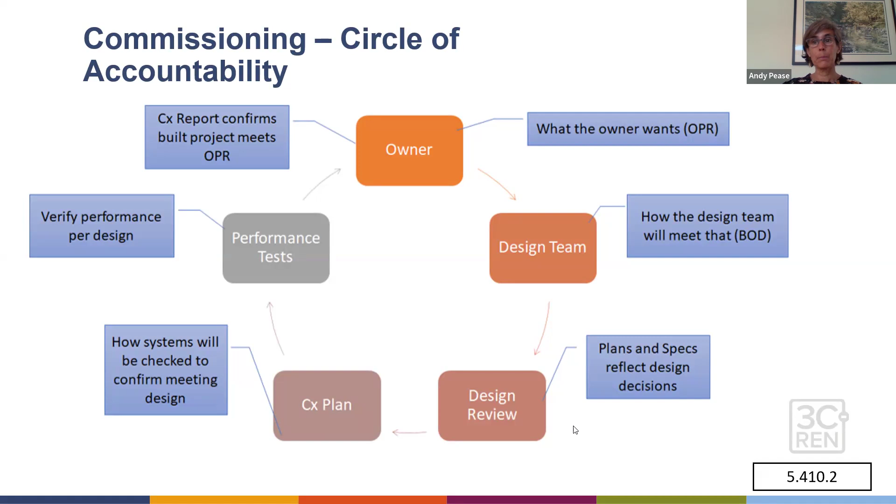So when you think about all the requirements for new buildings over 10,000 square feet, these first four are all required as part of your building permit. So don't wait on getting a commissioning authority if you have a non-res building over 10,000 square feet.

And then the rest of it is the actual performance testing, documentation of the training, commissioning report, checking the O&M manual. All of those things happen during construction and toward the end of construction. There's not necessarily specific things that need to be submitted at that point, but the jurisdiction, the inspector, can ask for all of those documents.

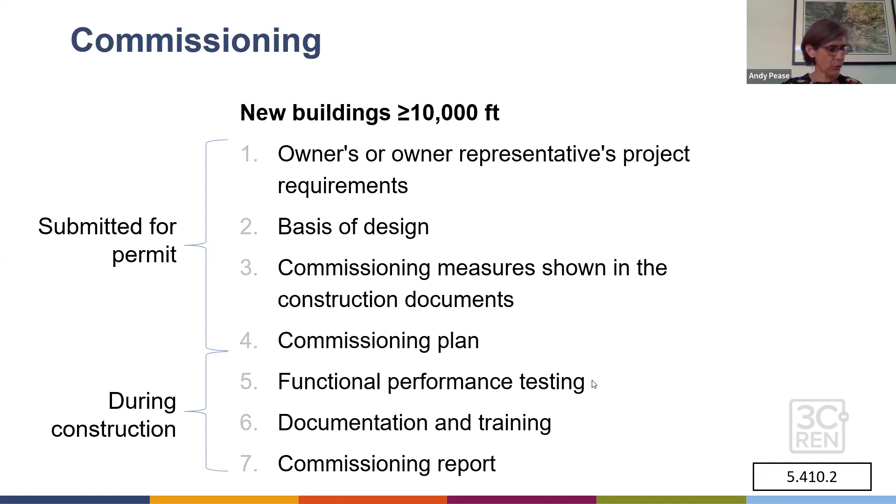Commissioning is one of those areas that overlaps with the energy code. The energy code has these nifty forms you can fill out online, and it shows you which documents you need to complete. There's a lot of forms available online and in the codes if you'd like to use those.

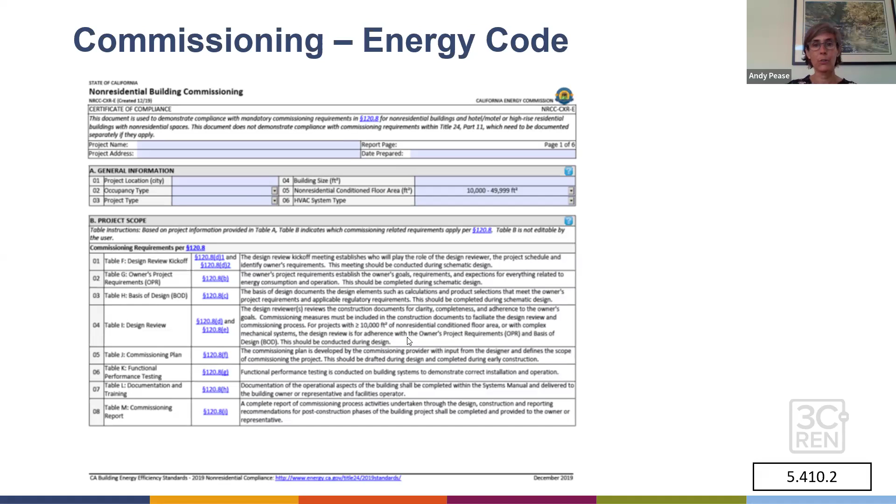It's required in the energy code. For projects under 10,000 square feet, there's a requirement to have a design review. That can be done internally, but you still need a commissioning document, even if your non-res project is under 10,000 square feet. So be sure to check that out.

The other interesting thing is that only CalGreen adds in commissioning of irrigation and PV panels. So they overlap, but each piece has a little bit of an additional requirement.

In CalGreen, for projects under 10,000 square feet, there's a regular testing and adjusting requirement you're familiar with in terms of like TAB. But the idea is that the engineer is part of outlining that process ahead of time, so it's not just the HVAC contractor doing a test and balance. This is outlined and has a report at the end, so the documentation should include notes and specifications.

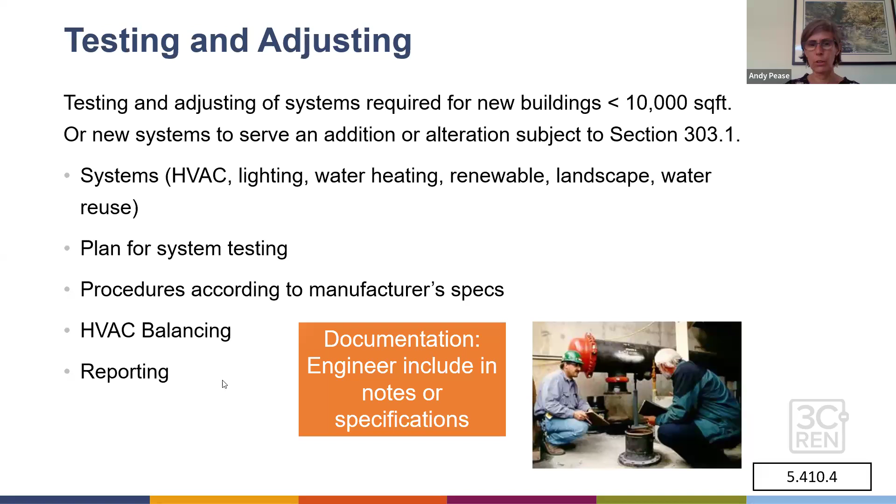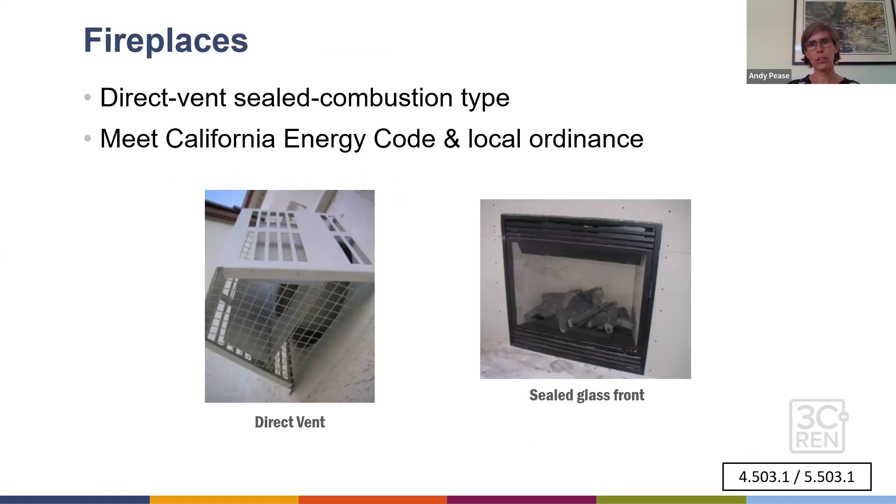The last section here is environmental quality. The familiar ones, of course, are that you can't have open combustion for fireplaces, if you have those.

For temporary ventilation, it's a MERV 8. MERV refers to the thickness and capacity of the air filter. Permanent HVAC systems require MERV 13, and it needs to be stated on the filter so people can see that. Again, that was a code update from last time.

We've gotten pretty good compliance on this one now. I think folks have caught on in terms of openings of ducts, because what used to happen is ducts would be hung up or come onto site with dust, moisture would get in, the dust would get damp and grow things, and it would be installed and get people really ill. So there's been a lot of focus on having the ducts delivered on site already capped at the ends, so you're not getting construction dust in there, and then once installed, having it capped down at the bottom.

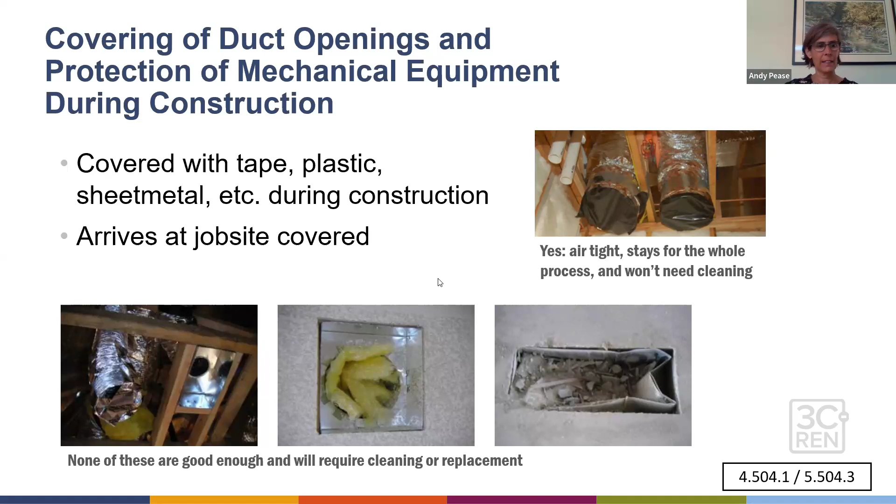These old ways of doing it that you might still see are not okay. You can't just stick in a little bit of foam, have them crushed, or tuck in the ends. You need an actual tape seal. So monitor for that and make sure they arrive covered. Same with equipment too. If by chance you see them uncovered, just ask to have them cleaned. It's not like you have to reject the whole duct system, but it does need to be professionally cleaned if it got dusty from job site dust or drywall dust, which is a pretty big culprit.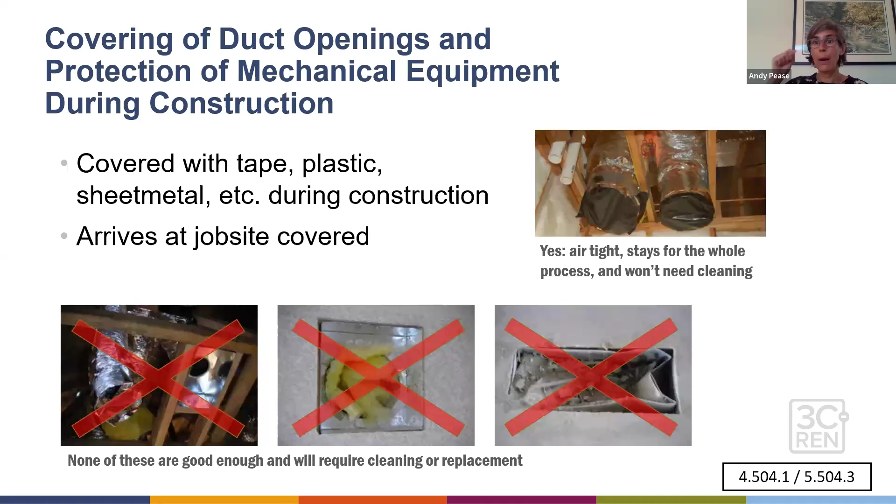For pollutant control, that's been one of the earliest requirements: low emitting materials. Thankfully, we've gotten pretty good about making sure we know the thresholds. The only time we kind of get dinged is when somebody uses an outdoor product, like a roofing mastic, inside. That might be over the threshold, but usually people are pretty good about that.

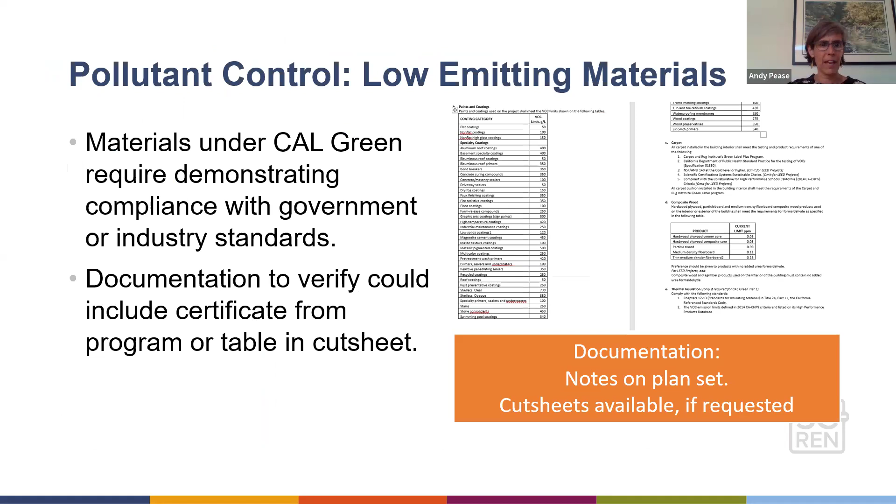You have to have cut sheets, since the building inspector is allowed to ask for all these materials. On our projects, we like to either have a binder or a Dropbox folder with a PDF with all of the VOC levels highlighted.

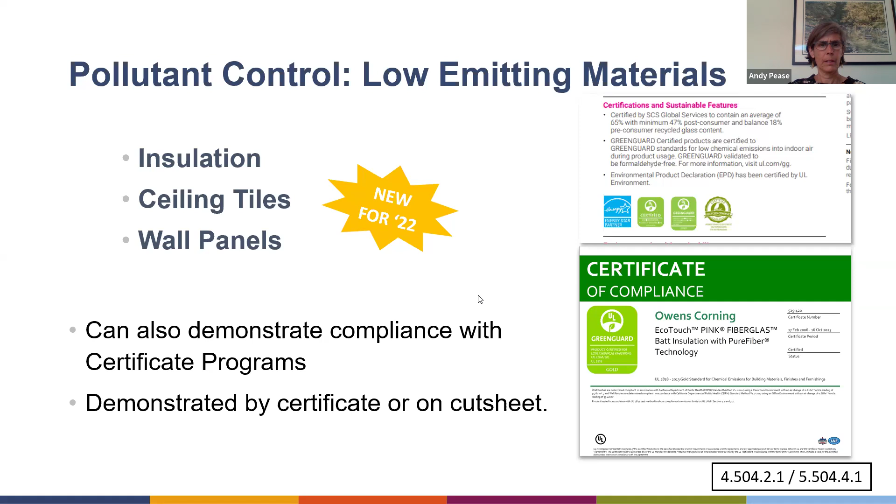New for 2022 is adding insulation, ceiling tiles, and wall panels to the low emitting requirements. Those were voluntary measures under Tier 1 and Tier 2, but now they're mandatory measures. So you can either have a third-party certificate.

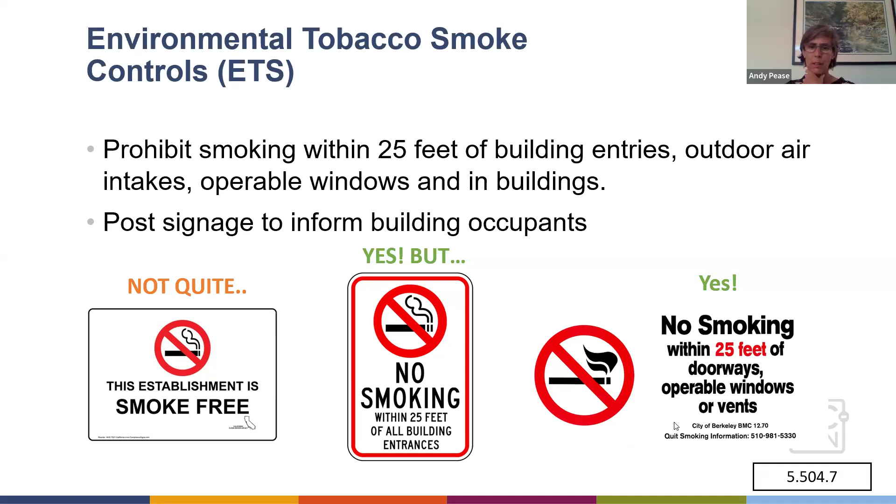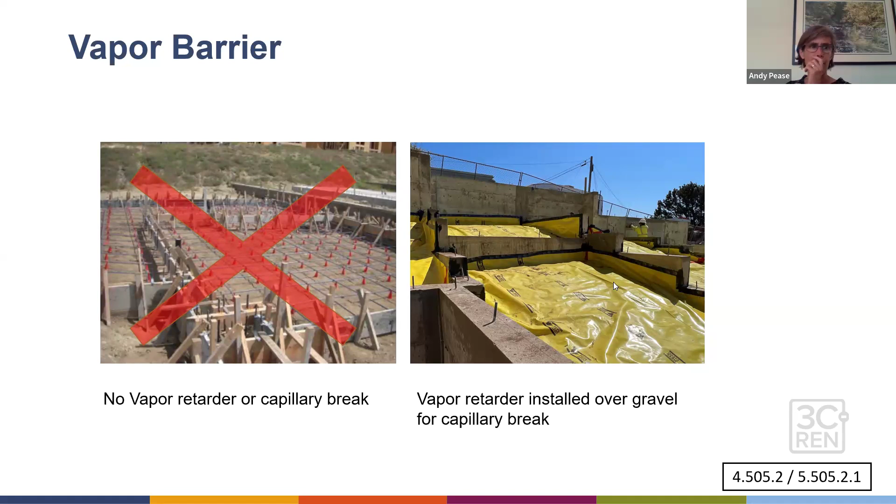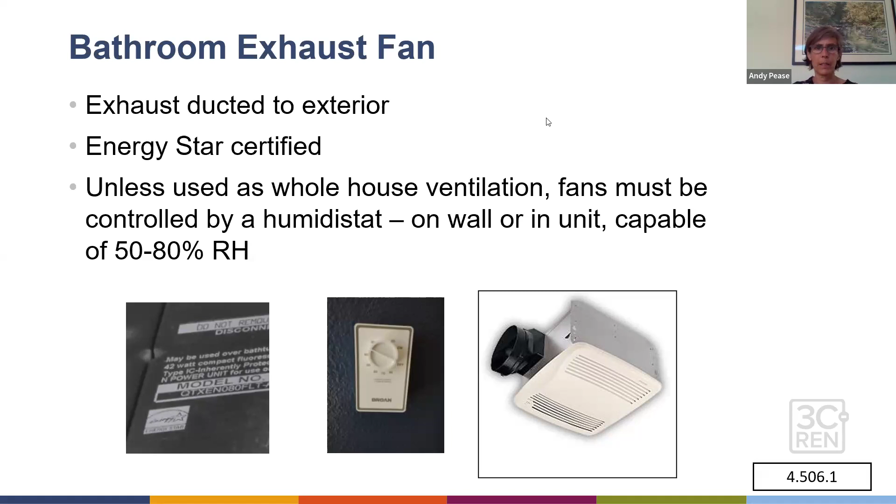And then exhaust fans, just making sure that your bathroom fans are triggered by a humidistat, not just a timer kind of control. You can't just do windows anymore. You certainly can do windows, but it also needs to have the fans triggered by the humidistat. And it can be in conjunction if you have whole house ventilation or ducted ventilation. Those things can work together as long as you have the relative humidity and the ongoing ventilation as well, which is in the energy code.

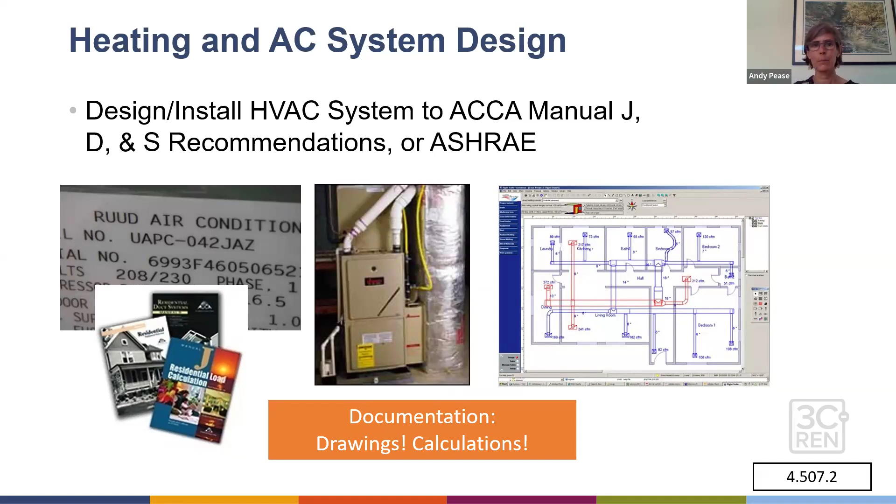There's a section about using ACCA Manuals J, D, and S for ducted design. We used to do the rule of thumb, like, oh, it's a 3-bedroom, 2,000 square feet, whatever, and then they would just kind of size the system, and it would often be oversized, and that's a waste of energy. So do show your drawings, the calculations, in order to comply with these. If you're doing ductless systems, you don't need the ducted design calculations, of course.

And then outdoor air delivery monitoring, carbon dioxide monitoring for non-residential projects. Again, these are ones that have been in the code a long time.

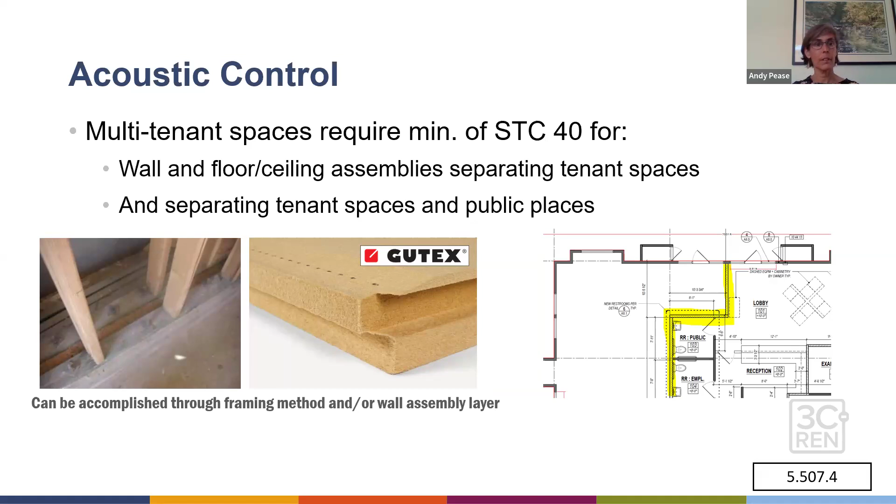And then if you are in someplace noisy, like near an airport, a freeway, or a train, then your walls and roof need to be STC 50, and your windows have to be STC 40 or an OITC of 30. So these kind of sound transmission maps are usually something a municipality will have in their noise element. And there's also a prescriptive, like a distance-from-the-freeway type of thing that you can use as well.

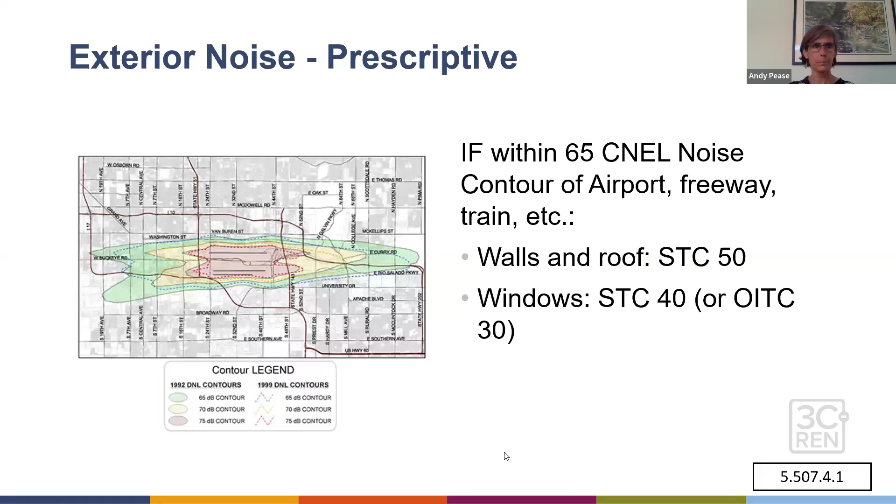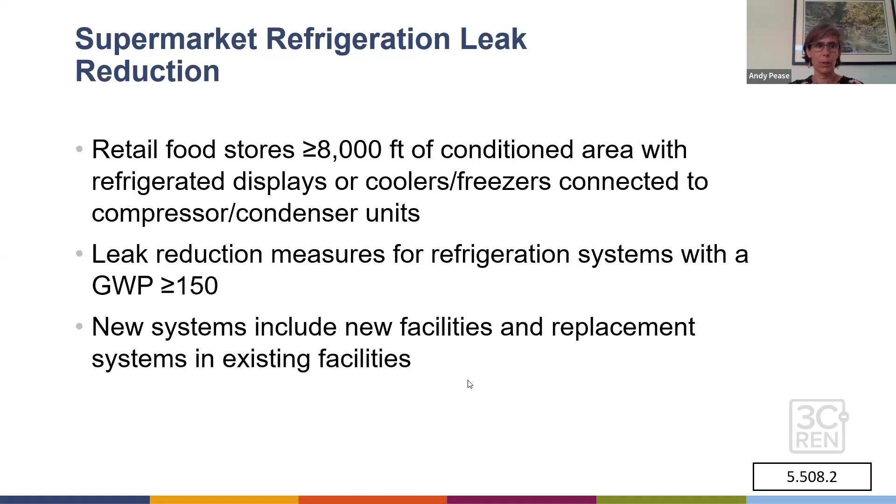Ozone depletion, for CFCs, halons—again, these are pretty standard at this point. Supermarket refrigeration was added in the code cycle maybe before last, to make sure that—because that's the thing, the refrigerant. If you're looking for what's the next thing we're going to be targeting, look to refrigerants, because R410A now has too high of a global warming potential. But refrigeration for wineries, supermarkets—we're definitely going to be looking at refrigerants for ways to reduce global warming potential.

Okay, so those are the mandatory measures. And we'll finish up here with just a quick touch on the voluntary tiers. Again, these are divided up by A4 for residential and A5 for non-residential. Basically it's kind of like a LEED checklist where in tier 1 you're adding in some mandatory measures, and then you need to pick a certain number of electives within each category. Tier 2 is a similar process, but just a little bit more.

And so it goes through for each of those voluntary tiers, residential and similar for non-residential. Again, these tables will be in your packet, and usually we have a big worksheet, so it's easy for the jurisdiction to tell.

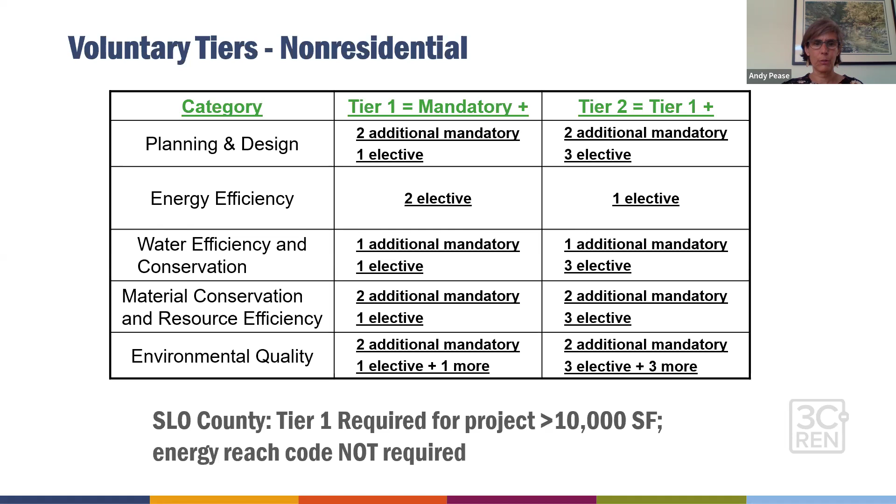And then I just wanted to add in here at the end that they've added in the intervening code cycle a bird-friendly building design as an elective measure under the energy tier 1, tier 2. And I think that's interesting because it has to be pretty important for them to bother to put it into the intervening code cycle. So this is something that is kind of triggering, like, oh, maybe this is going to show up as a mandatory measure because they're really seeing the impacts, especially as we have more density, taller buildings, that we're getting some bird deaths.

So the idea is to kind of look at this as a best practice going forward, so that 90% of the building elevation has bird-friendly mitigation strategies. And so that's the building facade and atriums, even glass rails can have bird damage issues or bird deaths. So glazing with visual markers, you could do films, you could do glass block or channel glass.

So maybe it's something that would be reflective in a way that doesn't impact birds in the same way. It can also be physical slats or screens or nettings or louvers. So just keep an eye out for that as kind of an emerging green building requirement.